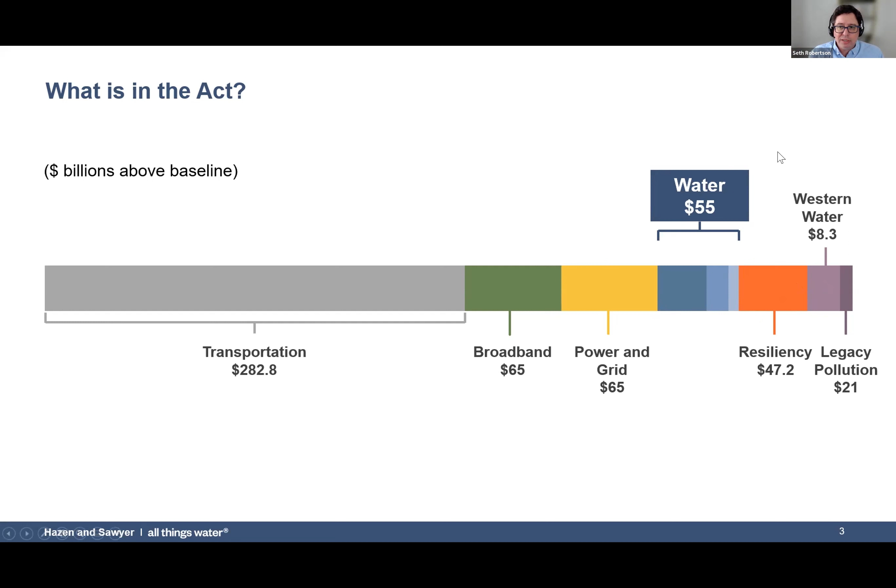One of the things out of that 55 billion that's very different than anything I've seen is the flip and the focus on drinking water. If you look at the SRF programs in particular, where most of this money is going to be flowing, most of it's going to be coming through the SRF.

Most of it's going to be going to Lindsay and their group and working through how to distribute these funds. What we've always seen pretty much universally is wastewater's always gotten more money, typically every year. It's an older program, it's had more in the system, but this is the first time we've really seen a funding source to the SRF emphasize drinking water.

And it's really in two major categories. One is lead service line replacement. $15 billion of the $35 billion for drinking water is going to lead service line replacement, and this is really in response to the lead and copper rule revision. So think inventory, investigation, replacing both private and public. And PFAS and emerging contaminants is another $9 billion.

Part of that's going to go through the SRF and part through other state means most likely. We're going to talk about PFAS in a subsequent session - that's obviously a big deal, and it's a large source of where this funding is going to come through. Another thing is we're just going to see a general increase in the base SRF amounts - $11 billion on the drinking water side, that just supplements the existing SRF.

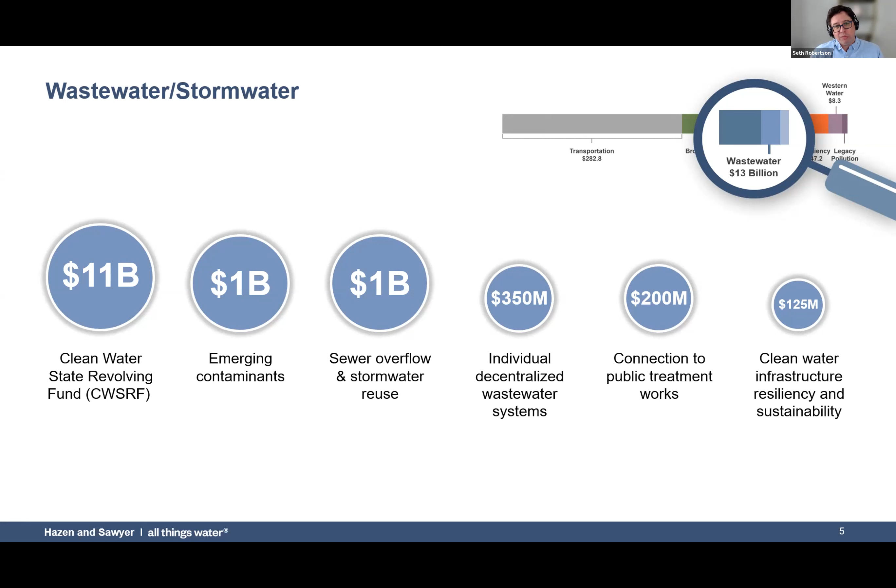For some of these other smaller programs, from pilot programs to just other new emphasis, that's going to take longer because you're going to have to set the programs up first, and then you're going to have to try to move money. So while some of the first money, especially from Bureau of Rec, is starting to happen now, I think SRF is going to be following very closely behind that. We're going to see some of these other programs probably late this year, even early next year, before they really get up and moving and start distributing funds.

Another thing that's been particularly exciting for me is an increase in water infrastructure resiliency funding. If you think about FEMA, which is where most of this money is going through, we've thought of FEMA in the past as mostly coming in after there's been some type of disaster event to either reimburse or to try to replace and repair infrastructure.

This has been a move that's really been happening over a few years, is to start providing more of an investment into pre-disaster mitigation type funds. So we've seen that in the FEMA hazard mitigation program. That's both a flood program. It's also the BRIC grant program, which is a relatively new program.

But we're starting to see more money, and we're going to see, I think, an ongoing emphasis in a number of the things that we're talking about today. So I don't think this is going to be necessarily a one-shot deal. So even if you look back at the drinking water numbers I threw out there, there are other funding sources potentially coming down the line, depending on how those spending bills are passed. There was the Build Back Better Act, which is kind of dead the way it is right now in Congress, that would add even additional funds potentially into things like lead service lines.

I think we're going to see more PFAS money coming down the line. You know, we're very early in the game for some of these things, and I think it just gives us an insight in what the focus is going to be, not just right now with this money, but also sort of looking long term as an emphasis from EPA's perspective.

Another thing that's continuing to get some play is cybersecurity and critical infrastructure. This becomes a bigger and bigger deal. The first time we really kind of saw this called out was probably in the ARPA funds, that there was a recommendation that those funds that were going directly to towns and cities and counties be considered for cybersecurity, especially around critical infrastructure, which includes drinking water and wastewater treatment, collection, distribution.

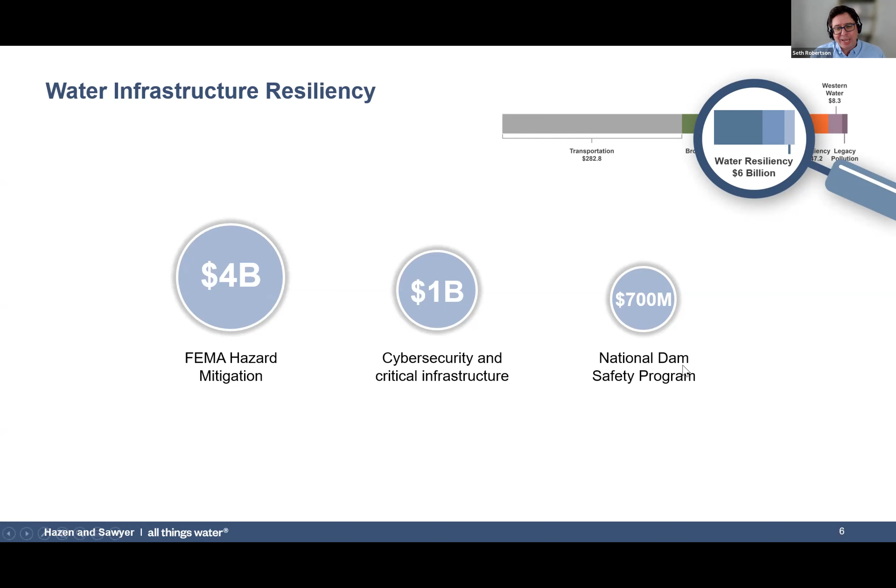Now there's $1 billion specifically set aside in this new bill to go towards those issues. Most of that money is going to be coming through Homeland Security from a distribution standpoint. And then we're also seeing additional money going through the National Dam Safety Program. Again, seeing continued shift in that emphasis to really removing dams from a water quality and safety standpoint, less on the repair side.

And then Western Water. So the Bureau of Rec is going to get its own basically $6 to $8 billion appropriation through the bill for a variety of different things. This money is actually most likely to move first. And Bureau of Rec is actually starting to move on some of these things. So this would probably be in many ways the money to pay attention to most right this moment, and to start sort of getting yourself prepared to go after some of this and to access some of this.

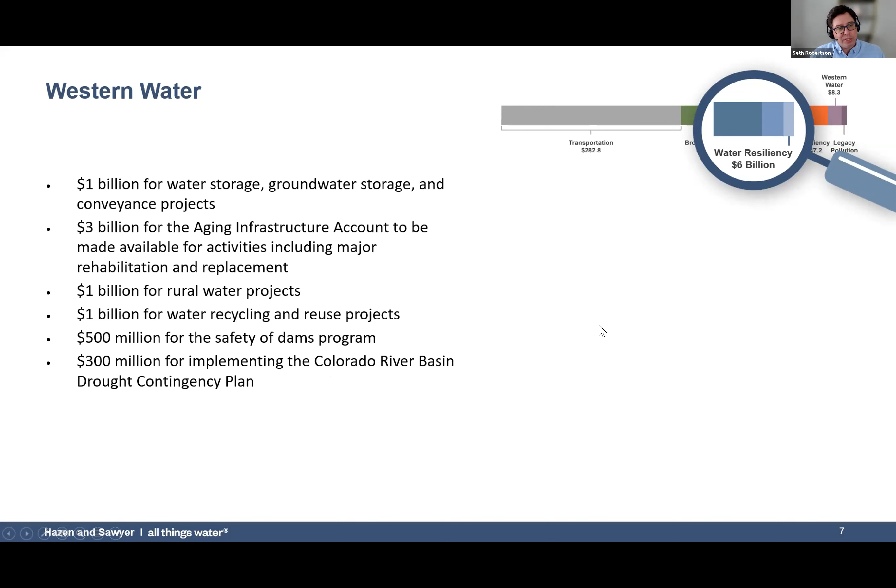So a variety of different things here, from aging infrastructure to general improvements to conveyance and storage and rural water and a number of different things. But again, a lot of existing programs here, existing sources, so it should be able to move pretty quickly. And then just talking really briefly about administration and why what Lindsay does is so important: the two main categories here outside of Bureau of Rec, which is really its own entity of where that goes and how that moves, is through the SRF and through FEMA, and they work differently.

So obviously you're familiar with the SRF program in Arizona, that you're going to work directly with them. They're going to work with EPA. The way this money will flow is through the typical capitalization grant process, which is how they get funded every year and have up until now. So it'll use similar processes. It's just going to have some different requirements, some different administration issues, obviously those specific set asides for different things that everyone's trying to work through right now, what that's going to look like and what those new conditions are going to be, especially things like Buy American and what impacts those are going to have. But that's going to be flowing over a 5-year period, basically into the SRF programs. And that's kind of how you're going to access that.

FEMA and their funds, for example, if you look at something like BRIC, it works differently. So you generally are working as a combination, both with your state emergency management agency and FEMA. The state emergency management agencies will basically gather projects that are an emphasis for them for sub applicants, and then they'll take those and apply for the money from FEMA, and it'll kind of pass through, and you'll be working with both. But it's a different setup, it's a different process.

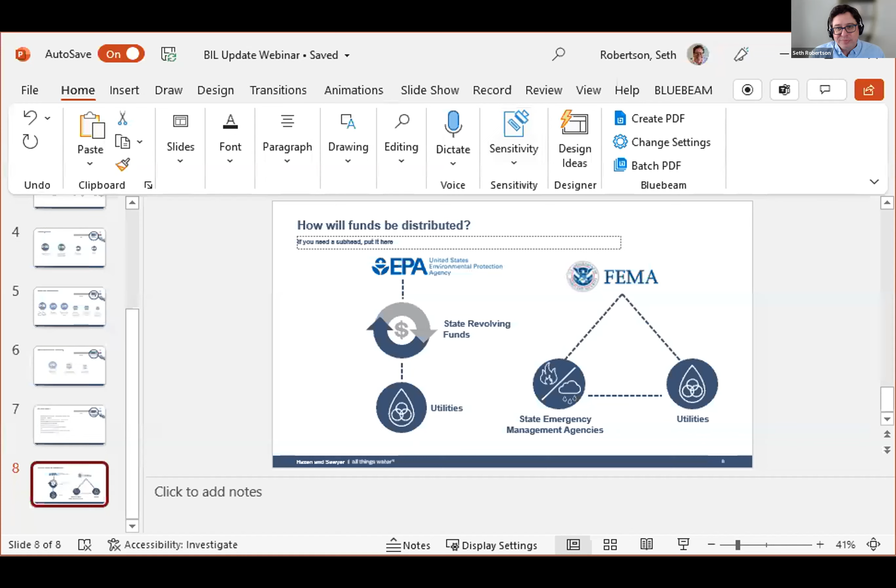Thanks so much, Seth. Yeah, I think that was a great introduction to the big high level picture of what BIL funding is all about. Just sharing my screen. One sec here. You able to see it? Yes, we are. Okay, perfect.

So as Seth mentioned and Andrea introduced me, I am Lindsay Jones. I work for the Water Infrastructure Finance Authority, or WIFA, and we are definitely staying very busy with all of this new money coming in. So before I talk more about the BIL funding specifically, I figured it'd be good to give a quick overview of WIFA, make sure everyone understands what we do as an SRF and who is eligible, what kind of projects are eligible.

So we manage the state revolving fund, which is basically getting grant funds from EPA, which we pass along as loans to our borrowers. And our real goal is to maintain and improve the water quality in Arizona and provide the financial and technical assistance that's needed to have all of our water and wastewater needs met.

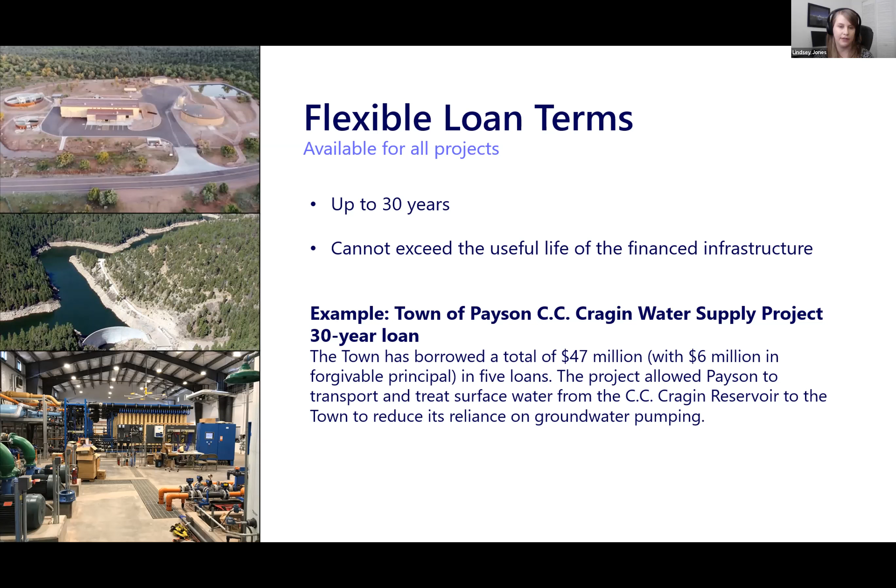As I mentioned, we can do up to 30 years for loans, with the one caveat being it can't exceed the useful life of the financed infrastructure. For larger projects, you could always have the option of splitting it into several loans, which is what the town of Payson did with their C.C. Cragin project, where they borrowed almost $50 million. They got about $6 million in forgivable, and they split that into 5 different loans. So lots of flexibility on the options for the loan terms.

We also, like I said, provide forgivable principal. So right now our policy for forgivable is for clean water projects, which are the wastewater and stormwater projects. If the community is eligible to be classified as disadvantaged, we can do up to 50% of the project costs. Or if they're doing green projects, any water or energy efficiency projects, reuse and reclaim projects, or stormwater projects, we could do up to 20%. And that's really just subject to availability and the priority list that we have.

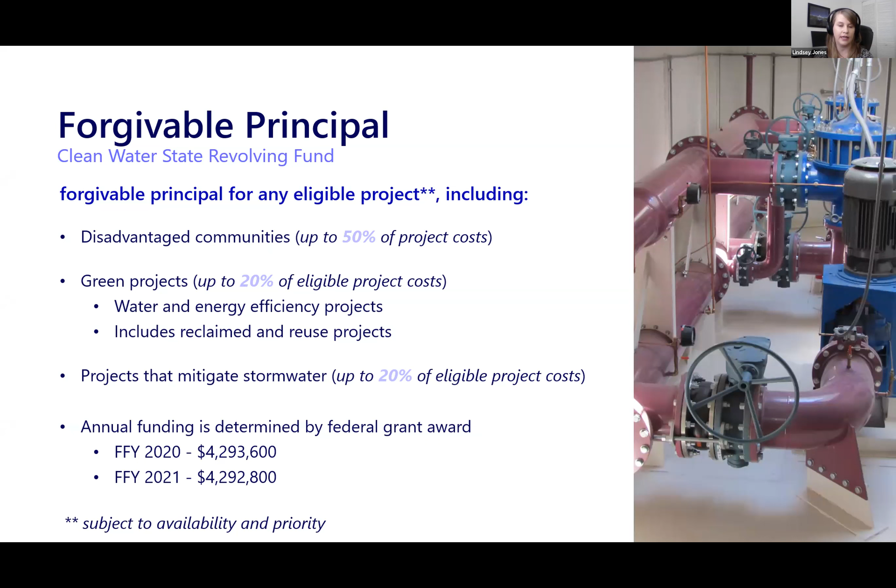So that's our current policy. And again, a few slides from now I'll get into the BIL funding and how some of this is going to be changing.

On the drinking water side, we also have forgivable principal. It does work a little differently, where basically we have 3 different tiers, which are more or less generous based on economic need and the public health benefits. So if they're disadvantaged and addressing a public health threat, we're going to be able to offer the most forgivable principal. The second tier is either disadvantaged or public health threat. And the third tier is for all infrastructure projects.

So on that side, we can be a little more generous, just because typically we've had a little more forgivable that we've been able to work with. So next, I'm going to discuss the specifics around the BIL funding. But first, I did want to give a definition of how we classify communities as disadvantaged.

It happens during the application process when an applicant puts in their initial project priority list application. We will score it and determine if they can be classified as disadvantaged. It's going to be based on affordability. If your community has low median household income, high water or wastewater rates, and a high level of existing debt, most likely you'd be classified as disadvantaged, and that would make you eligible for more forgivable principal. Or if the community is a colonia, then it's automatically classified as disadvantaged.

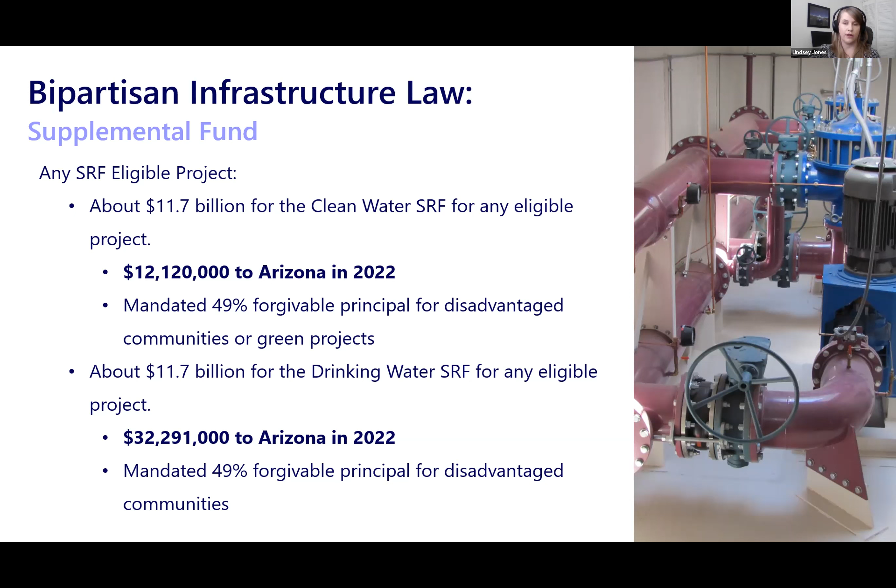As mentioned, there's also going to be specific money for the lead service line replacement fund, which is just going to the drinking water SRF. It's going to be about $50 million coming to Arizona SRF for 2022, to do full lead service line replacements. It can't be for partial replacements, but it could also include anything from planning, identification, design, and inventories to comply with the revised Lead and Copper Rule.

And again, they are making it a requirement that all of the forgivable we're able to offer, which is 49% of that 50 million, so about 25 million, will have to go to disadvantaged communities.

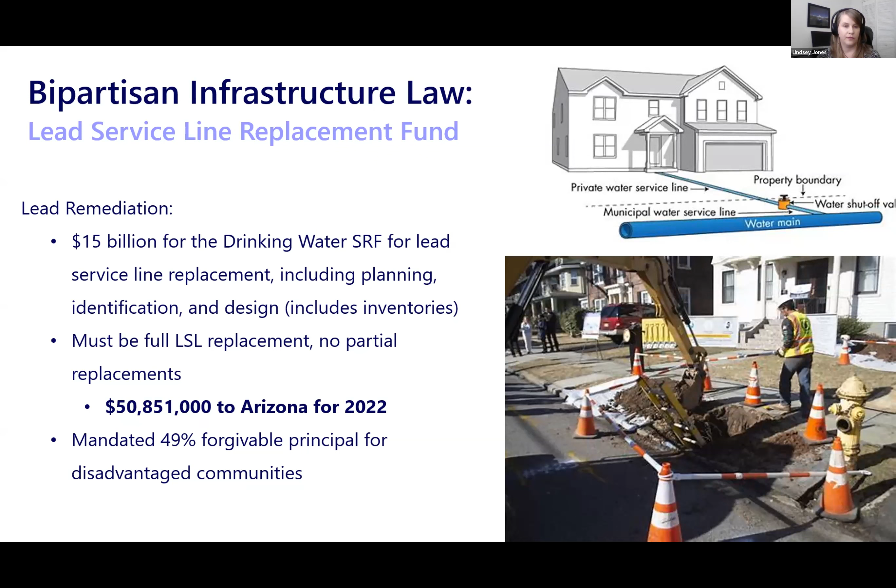And then we have the Emerging Contaminant Fund. That will have funds going into both the drinking water and clean water side.

On the clean water side, it's not a ton of funding. It's about $600,000 in 2022. Starting in 2023, it'll be about $1 million, and that'll continue for the next 4 years.

It will be available as 100% forgivable principal, and there's no restrictions for the clean water emerging contaminant funds on whether it has to go to disadvantaged communities or not. So pretty much anyone is eligible if you're doing a

PFAS project. We've also talked with EPA about other possible uses, especially on the clean water side. I know we have a project right now with Flagstaff where we're helping to pay for a forest thinning

project, and they seem to think that could be eligible for the clean water emerging contaminant funds because it really helps to protect the watershed from a variety of contaminants that would possibly occur after catastrophic wildfires.

So we could definitely be as imaginative and try to push the boundaries of what we could use that for, as long as it's addressing some sort of emerging contaminant.

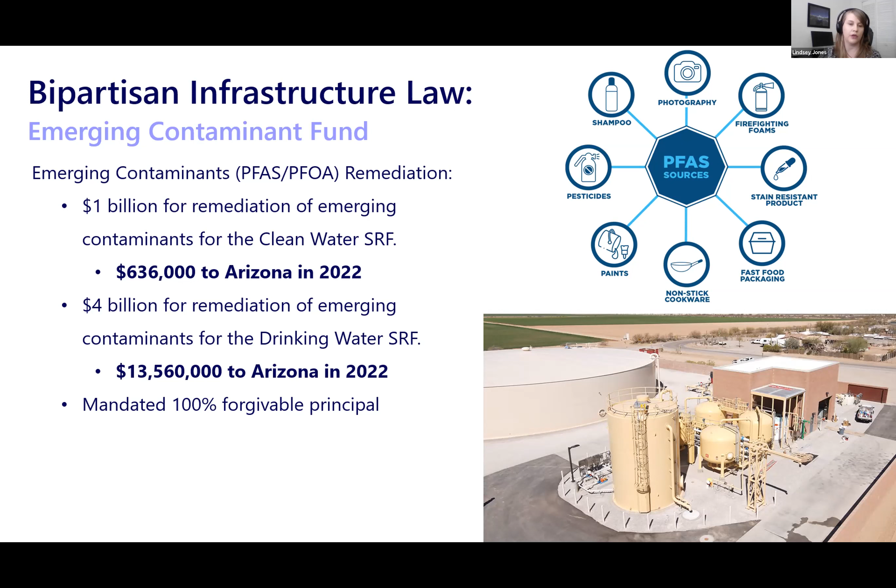And then really the big next steps. As Seth mentioned, we just recently got the BIL implementation memo from EPA. So we have been waiting for that for quite some time.

It just recently got released. So we are trying to work as quickly as possible now to create all the policies and procedures based on

the guidance that was provided in the implementation memo, and just how the funding will work, and more specifically how the new forgivable principal procedures will work and how the percentages are going to be allocated for different projects.

We also have the new Build America, Buy America Act, or BABA, which is across the board for all federal funding programs now. But for WIFA, we have...

We've known this is coming now, but we're still waiting for guidance from the Office of Management and Budget. OMB is newly in charge of this program, so I think they are also kind of scrambling to get guided, to figure out what guidance to provide.

It will go into effect starting, I believe, May 14th. So it's definitely coming soon. And it basically means pretty much all construction material is going to have to be domestically produced, similar to how right now we have the American Iron and Steel requirement.

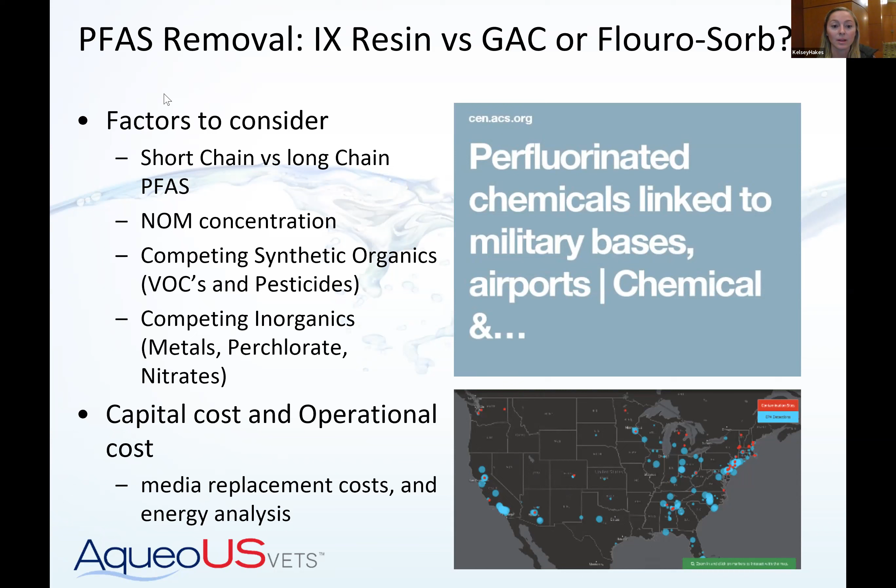Next slide, please. So just quickly touching on some of the key differences between those medias.

Typically, you're using a bituminous coal carbon for this application. They found that coconut carbons just don't work or don't last quite as long as the bituminous coal carbons. Go ahead with the next slide.

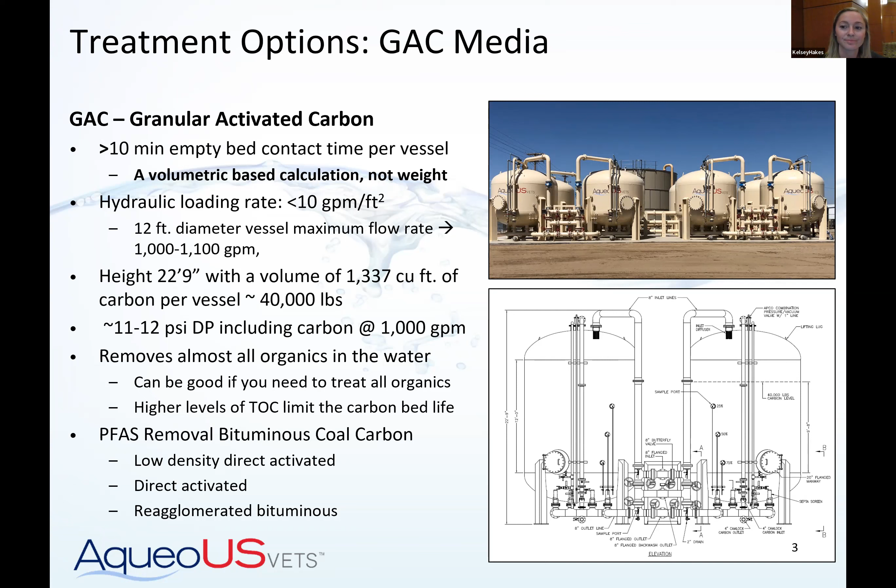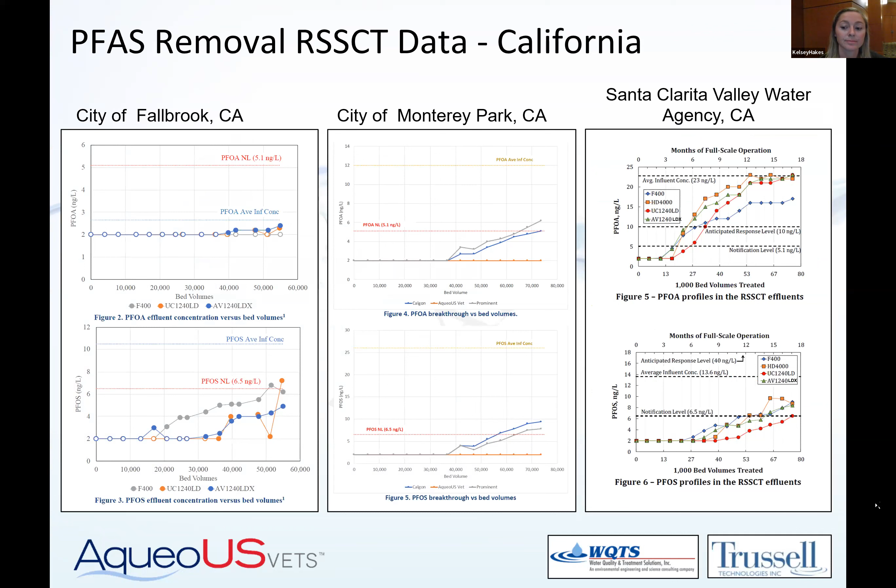There are already many full-scale installations, even in Arizona, with the City of Tucson - they're doing a dual application for peroxide quenching and PFAS removal. The City of Marana is using granular activated carbon for PFAS removal and peroxide quenching. So there are a lot of sites already in full scale, up and running, using carbon to treat for PFAS removal out there. These are example sites that you can reach out to and learn their design practices and see any lessons learned that they've gone through in their process.

Moving on to ion exchange resin, how that differs from granular activated carbon is it requires a lot less empty bed contact time. If you remember, carbon was 10 minutes empty bed contact time - typically, I'm seeing with ion exchange resin that people design to 2 to 3 minutes per vessel. What that means is you need about 5 times less volume of media in that same size vessel, so typically you can get away with much shorter vessels. Looking at the system drawing in the bottom right, that system height is about 16 feet - remember, the carbon system was about 23 feet, so significantly shorter.

Also, an advantage of ion exchange resin is you can allow a lot more flow rate through a single system size. Where that carbon system was 1,000 GPM for a 12-foot diameter vessel, that same 12-foot diameter vessel can actually go up to 2,000 GPM for ion exchange resin. So typically, with resins versus carbons, the resin systems are going to be a bit smaller in footprint and shorter, and the carbon systems will be a bit larger. I'd say the disadvantage of the ion exchange resin is it does produce more head loss than the carbon treatment system, so evaluating those energy costs in comparison to carbon, and also looking at your pump curves and making sure you don't need any upgrades to your pump or require any boosting if you were to go down the ion exchange resin route.

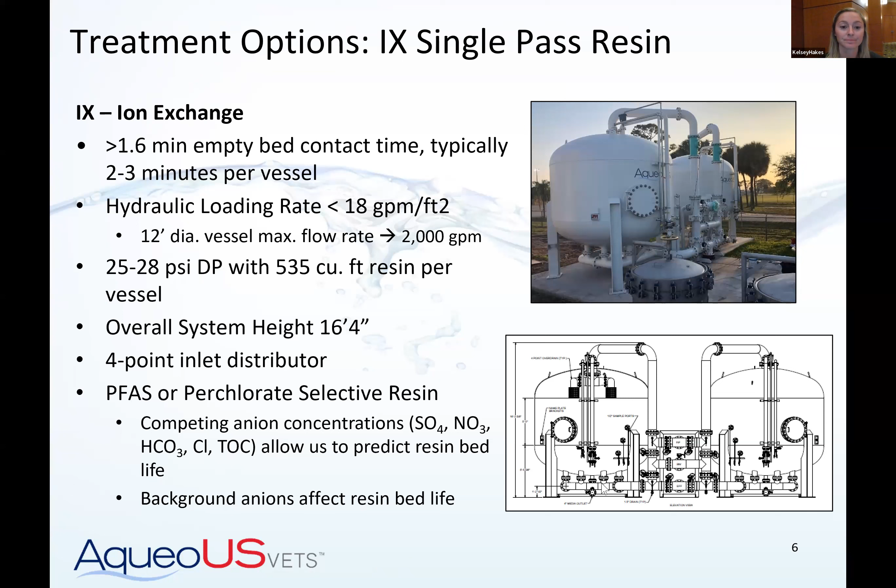And there are many installations for ion exchange resin systems. The nice thing about the PFAS selective resin really originating from a perchlorate selective resin is that there's many installations for perchlorate treatment, actually mostly in California, in Southern California from the contamination there, which means it's tried and true to the industry as well.

You guys in Arizona have not seen the need as California has for a single pass ion exchange resin. You guys typically use resins for nitrate, but that's a different type of system in that you're doing on-site regeneration, or even if you've used resin for arsenic, that's also an on-site regeneration resin. This is single use, which means you send it to an incineration facility, and then you'll be using virgin resin with each change out. Just basically like you do with carbon, in the sense you're receiving back virgin material after it's spent.

But some of the locations that have already moved forward with ion exchange resin, I've mostly been in California as far as nearest location to Arizona. There is an ion exchange resin system going in with the city of Tempe that we're currently manufacturing, but it has not been installed yet. It's under production.

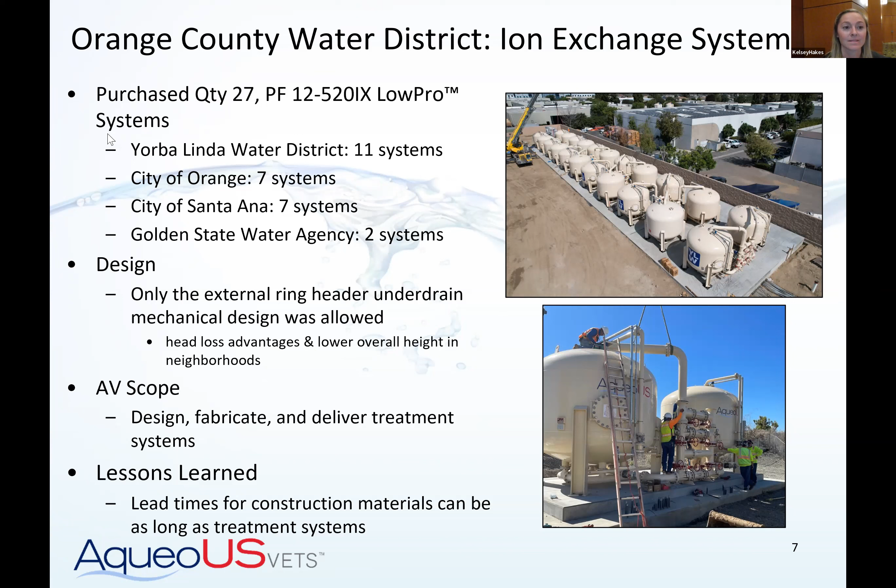And even though there are in-lab testing methods for granular activated carbon, there currently isn't an ASTM method for ion exchange resins. So you can always go the route of piloting, comparing the two media to one another, or even comparing products to one another, because there are several manufacturers out there for resins, and several manufacturers for carbons as well. Depending on your water quality, the results will change on which is the better selection for your site. The water quality is the most important factor, I'd say, in finding out what product is best for your individual site. So go ahead, next slide.

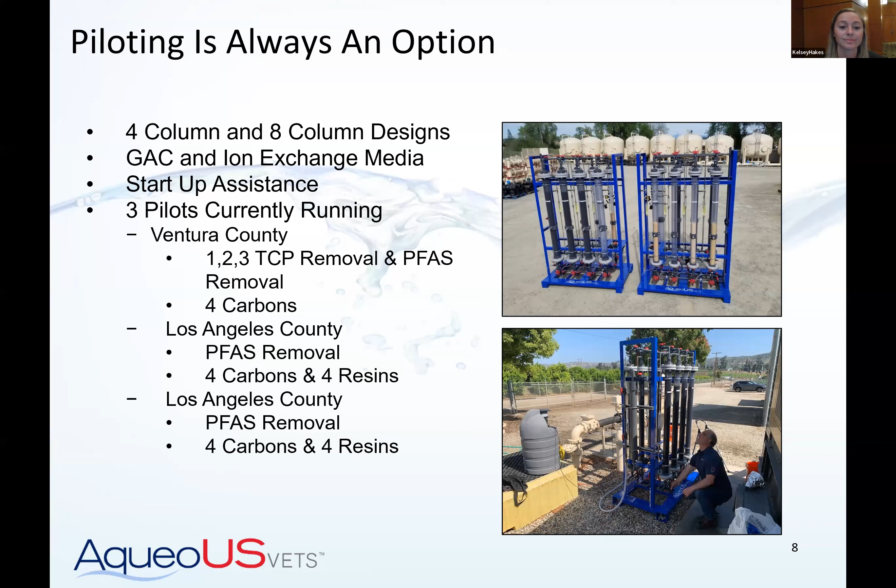And then last slide, just showing you a comparison between the ion exchange resin and granular activated carbon. There's benefits to both, but it's really evaluating your individual site and your project needs. Typically, I find that if you've got a very small footprint site, ion exchange resin is the better selected media because you just don't need as large of equipment or as many systems for higher flow rates.

If someone's trying to avoid pump upgrades and looking for less head loss, you could go with granular activated carbon. When you have dual applications like the city of Tucson or city of Marana, where they use the carbon for peroxide quenching downstream of their UV AOP system, they make it a dual application system where they're also treating for PFAS.

And then resin also offers you a performance guarantee, which is great because it's a selective media. It's a lot easier to model accurate predictions on the bed life. Whereas with carbon, since it adsorbs all organics in your water, your TOC levels play a large factor in how long that carbon is going to last. And as you know, TOC is a makeup of thousands of organics, and they all have different adsorption rates. So a concentration, while good to have, doesn't really tell us enough to say how it's going to interact with that carbon and how it's going to affect that carbon's life.

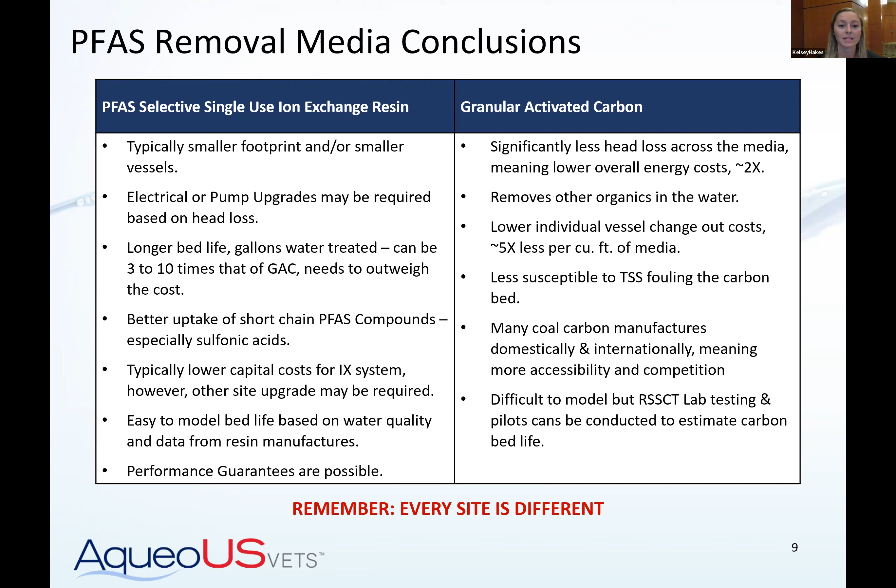And I think next slide, and I think that's it. Tried to be quick there, so if there's any questions, let me know.

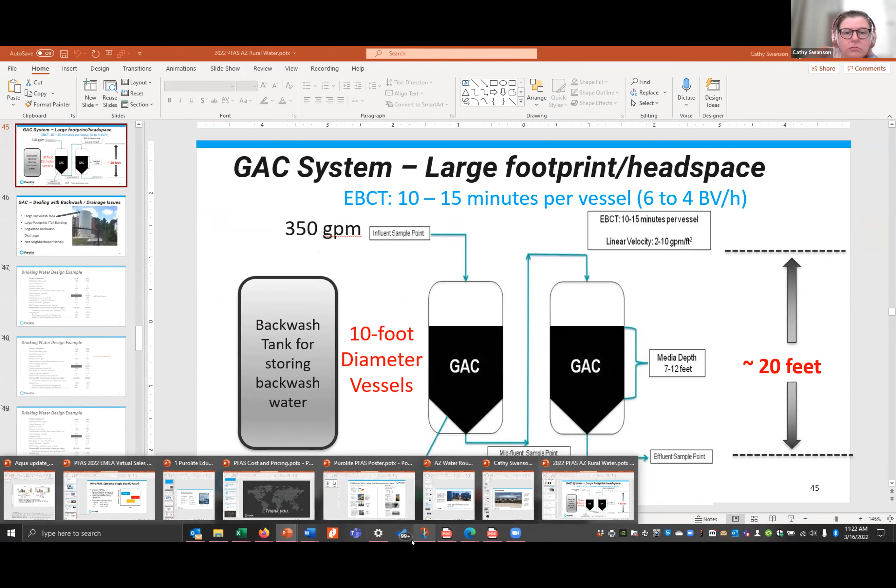Of course, it's at the end. Okay. That's the wrong one, actually. My apologies. Okay. Good.

All right, PFAS. It's interesting, I've had a lot of people say to me, why do we care? It's parts per trillion. Every time they come up with a new measurement, we get a new regulation, is how some people feel, and I understand that.

We are talking about parts per trillion levels. The problem is it's bioaccumulative and environmentally persistent. That's why we call it forever chemicals. It does accumulate in the blood. Basically everybody on this call probably has a pretty good chance of having PFAS in their system.

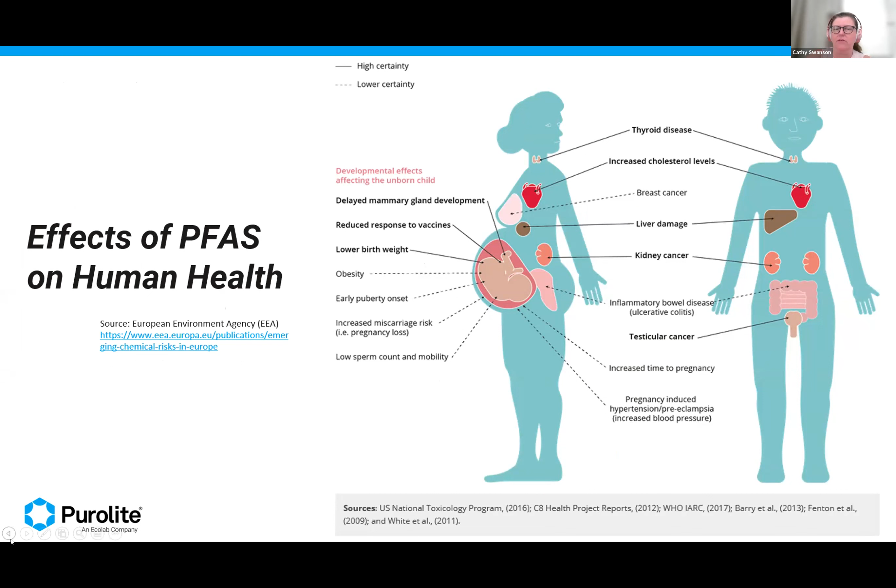Why do we care about that? It's because there are a lot of documented health effects when it comes to PFAS. The European Environment Agency put this graphic together, and I think it's extremely effective. The ones with solid lines are higher certainty, the dashed lines are lower certainty. But there's quite a lot of health effects that PFAS can have.

I realize not everybody on the call is looking at drinking water, but at the end of the day, the EPA is also looking at PFAS regulations for discharge permits, and of course we're going to be talking about biosolids. If we can keep it out of drinking water and take it out at the source, then we don't have to worry about it on the biosolids side either.

The trend over the years has been to regulate to lower levels and regulate more and more PFAS. Hawaii came out, and I believe they have health advisories for 18 different PFAS compounds right now.

Interesting. So I work for Purolite, an ion exchange manufacturer, and I believe very strongly in ion exchange as a solution for PFAS.

Couple different reasons, and Kelsey touched on some of them. It's a smaller footprint. It's effective at long chain, and more effective than other technologies at short chain. You don't have any liquid waste during operation. And at the end of the day, everybody speaks wallet.

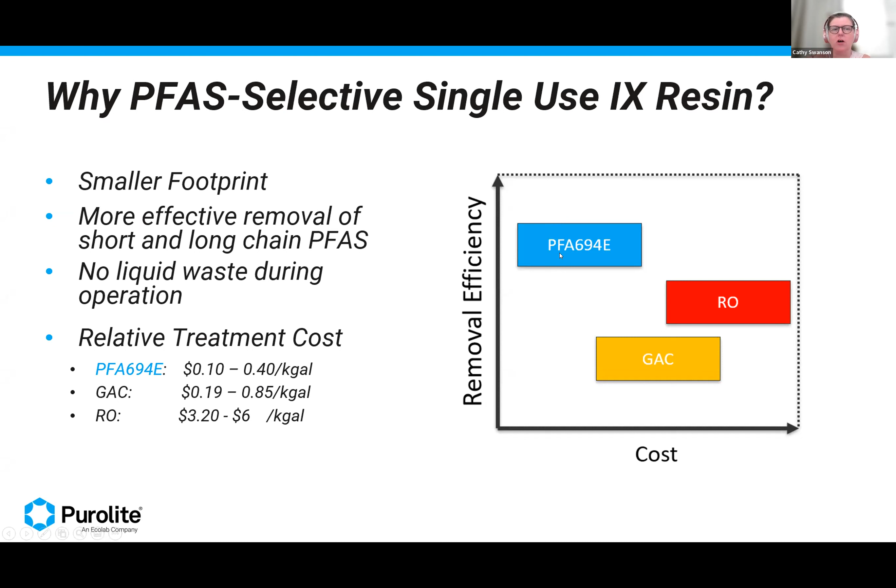As Kelsey said, it's going to depend on your water quality. There are some waters where it's cheaper to use GAC. But really taking a look at that and figuring out what's best for your system, we generally find that ion exchange is a lower cost operationally, as well as from a capital perspective.

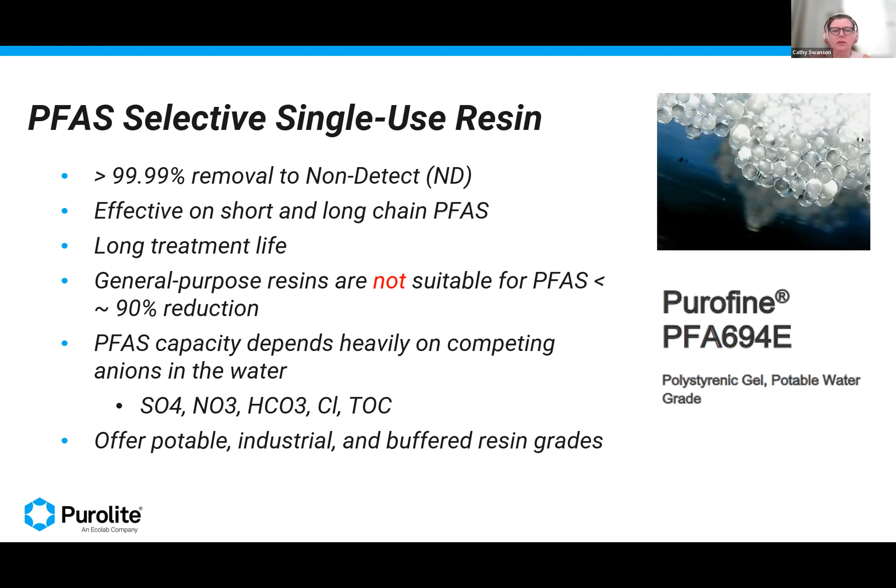So we have a PFAS selective single-use ion exchange resin. It can take PFAS out to non-detect. One of the nice things about this resin is that if we have information on the other background ions in the water—sulfate, nitrate, chlorides, etc.—we can model with extreme accuracy how long that resin is going to last.

We do have a design guideline book. Give me a shout if you'd like a copy of this. It's not a book, it's a brochure, but it's pretty helpful in trying to figure out how to treat in a system.

Some people have done RSSCT studies comparing ion exchange and GAC. This is one site in Arizona, done by Carollo. With this particular water quality, they found that the ion exchange resin gave them almost 10 times more life in terms of time.

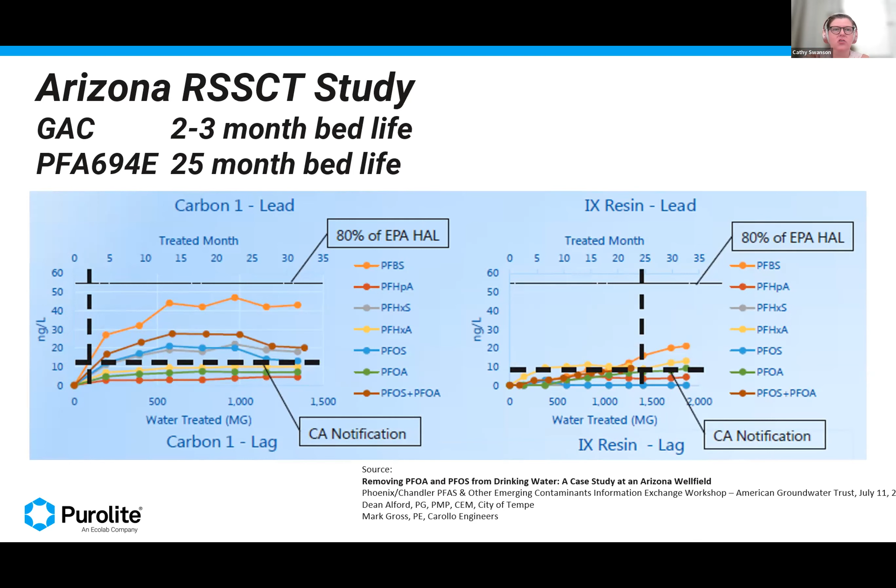There are numerous installations in at least half the states in the country, including Arizona. This is one example right here, at the Air Force Air Base Luke. They put in a system to treat drinking water. That's been up and operating—time flies—but it's been at least within the last year.

As Kelsey mentioned, there's a couple more going in Tucson and Tempe. So definitely experience within the state.

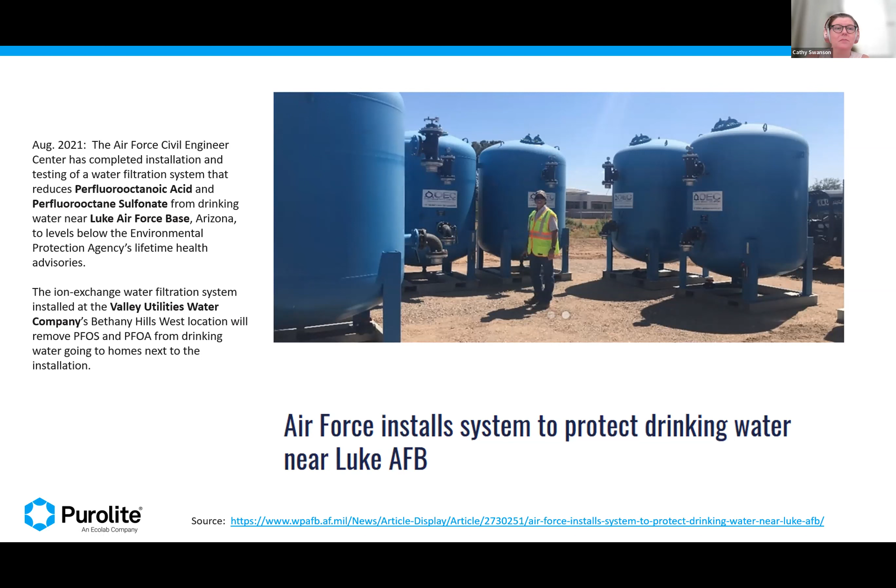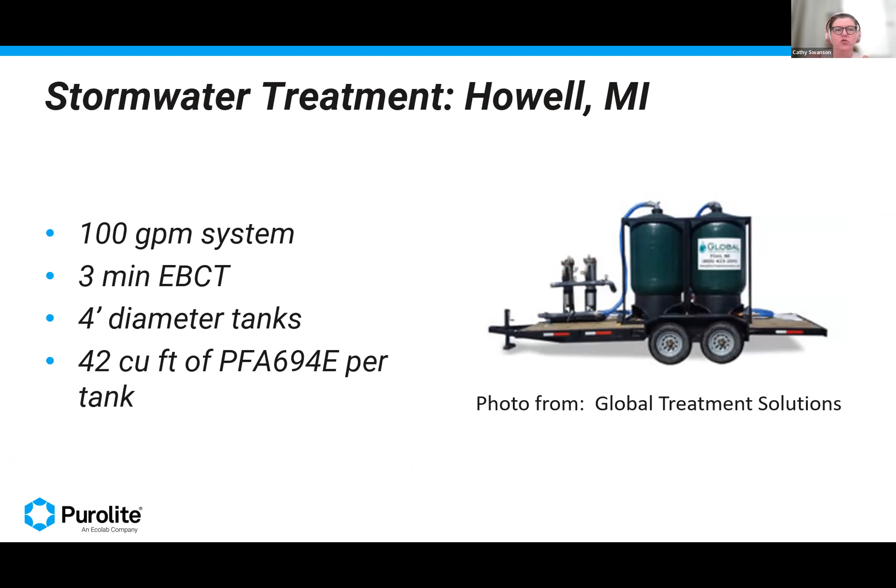This is a stormwater treatment system in Howell, Michigan. It's a little 100 GPM system, basically a couple of vessels on a trailer. It's been running for over 2 years without a change out, so it's pretty affordable from the standpoint of a little portable mobile treatment system.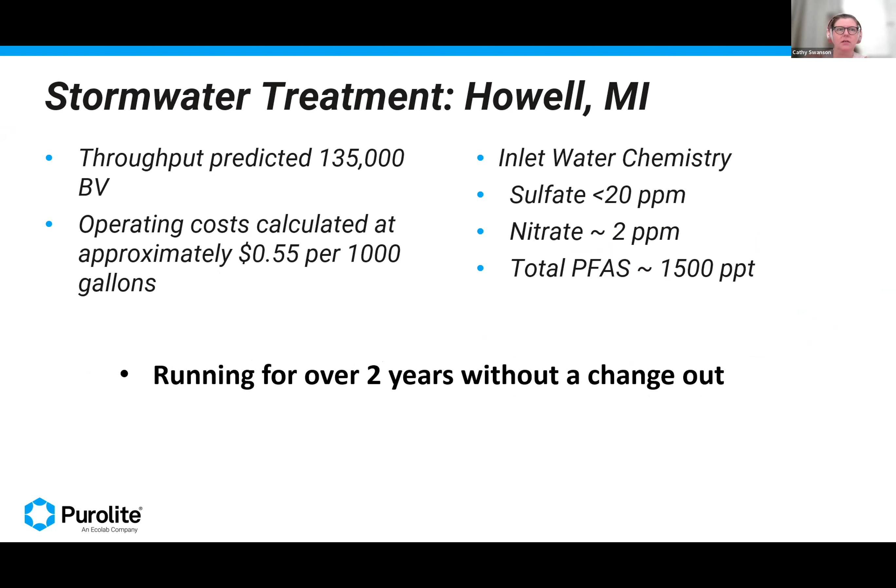Jeff, would you like to share with us a little bit about your experience with PFAS?

Hi, how is everyone? Great, here in Pima County, we—let me try to share my video as well. It keeps changing screens on me when I hover over it. It's a nice trick.

Here in Pima County, we are very cognizant of some of the challenges our local communities have been having with PFAS. We all know we have PFAS in our groundwater systems, especially if located near a previous military installation or an Air Force base. One of the questions we had was: did the PFAS in our groundwater system get there solely from seepage, or were wastewater treatment facilities a contributing factor, discharging to our waterways and also our biosolids that we've been land-applying for the last 40 years here in Pima County, predominantly in the Marana Farms just north of our city, all the way up to Casa Grande.

In 2020, the Board of Supervisors took a one-year hiatus on land application of biosolids to do a study determining the impacts of our activities over the last 40 years. We selected land application sites that received biosolids at different intervals over the last 20 to 30 years and at different loading rates.

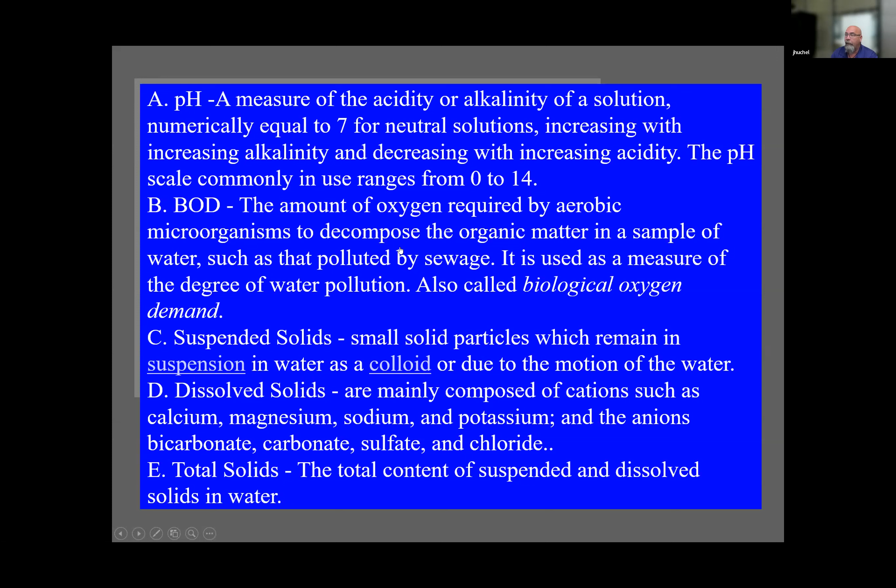So again, pH is a measure of acidity and alkalinity. BOD, the amount of oxygen required for aerobic microorganisms to decompose organic matter. Suspended solids, small solid particles that remain in suspension in the water. Dissolved solids, we all know what those are: calcium, magnesium, sodium. And then total solids, the total content of suspended and dissolved solids in the water. And Salas, you get to pick again. I got 500 points for that. Laboratory for 100. All right.

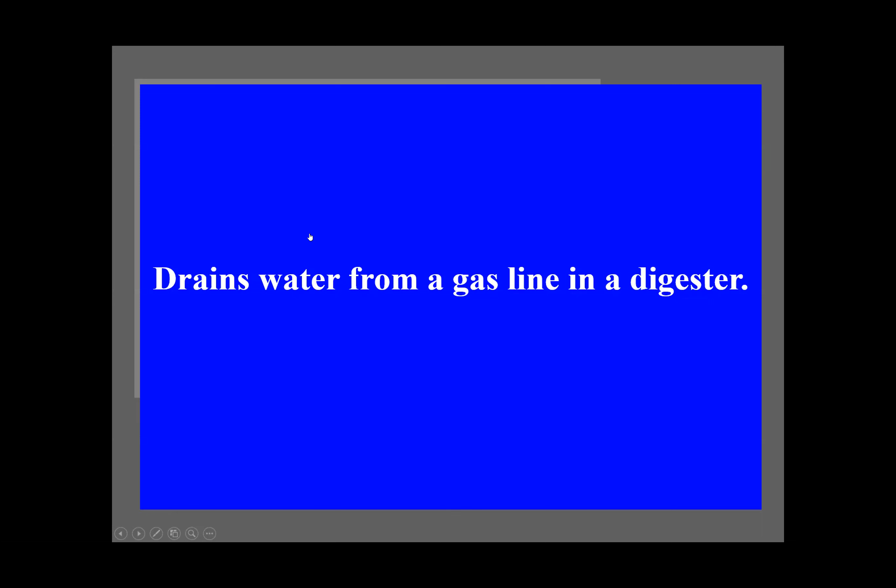What's this water from? What is a condensation trap? Who answered? That was Mike Davis. I'm sorry, I need to play by the rules. Oh, that's okay. You're doing good. What is a drip trap? Yeah. Condensation trap, drip trap. Good answer. Does that work? Yeah, that works. It all depends on what part of the country you live in. There's all sorts of names. Next, activated sludge for 100.

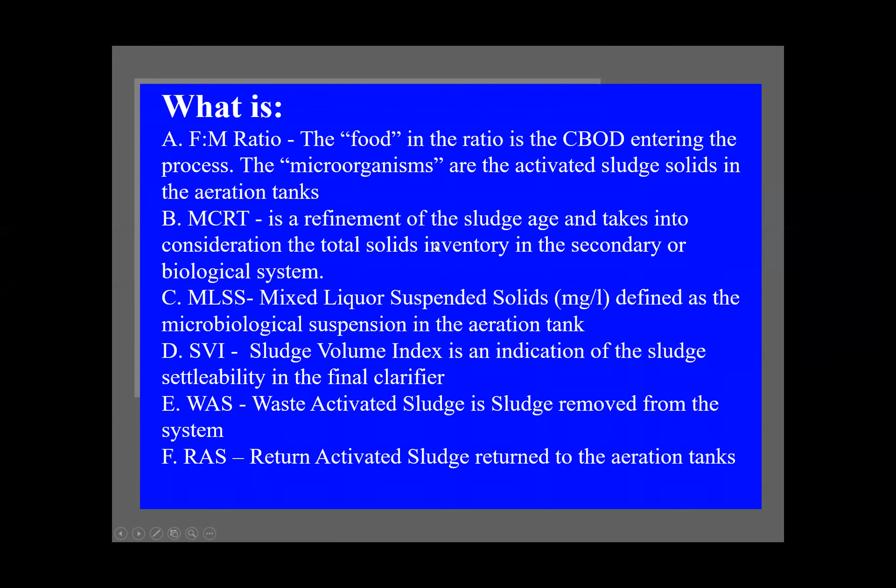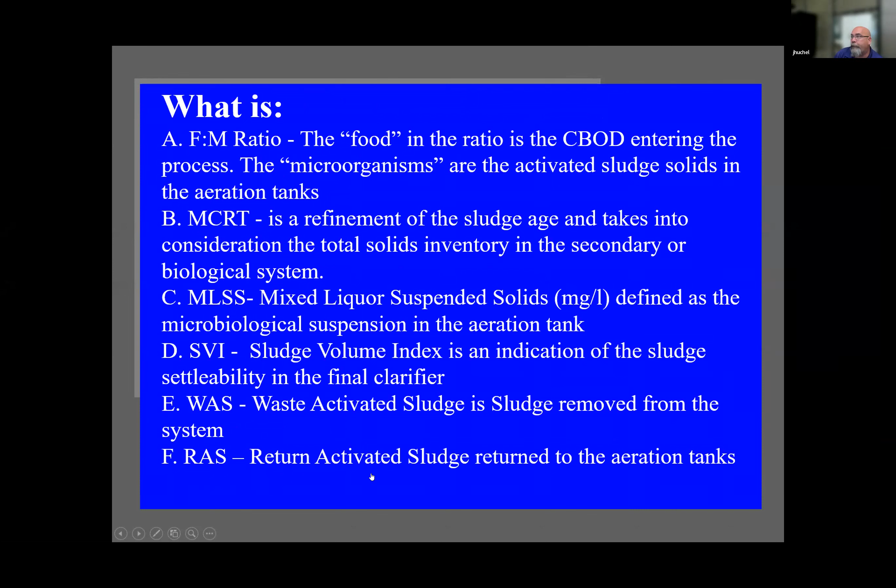And you only have to do one of those. I'll give it to you. Darren, RAS is return activated sludge. Good answer. And again, whenever I first set this up, it was for training. So I was trying to get across a lot of different points. So that's why there's so many different answers. But you're exactly right. So what is our next topic? Activated sludge for 200.

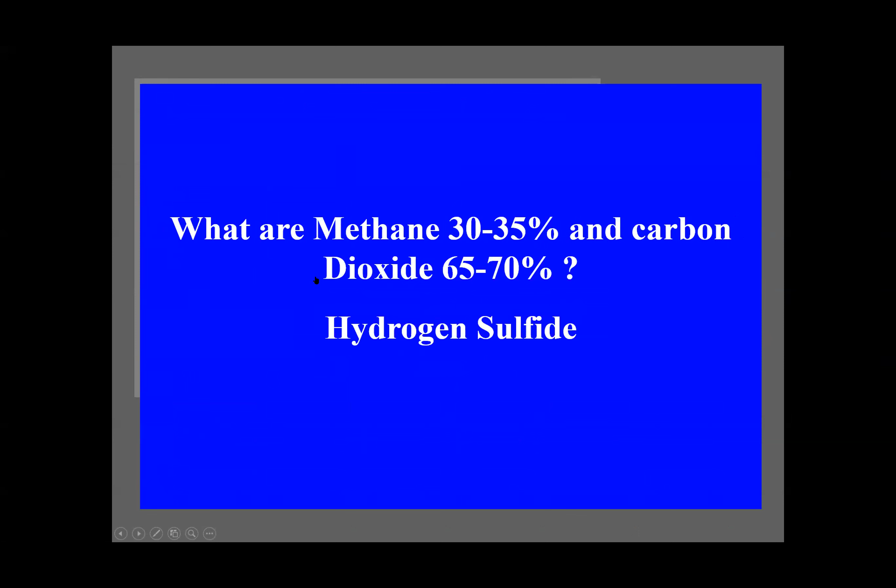Oh, I think I hit the wrong one. My bad. Anybody want to go on this one? Mike Davis: methane and carbon dioxide. Do you want to guess another one for the bonus? H2S, hydrogen sulfide. Look at that. He gets double the points. Nice. That was for 200, plus he got the extra points, right? Yep. So a total of 400 points on that one. Good job. And then we're going to go back to activated sludge because I clicked the wrong button. Gotcha.

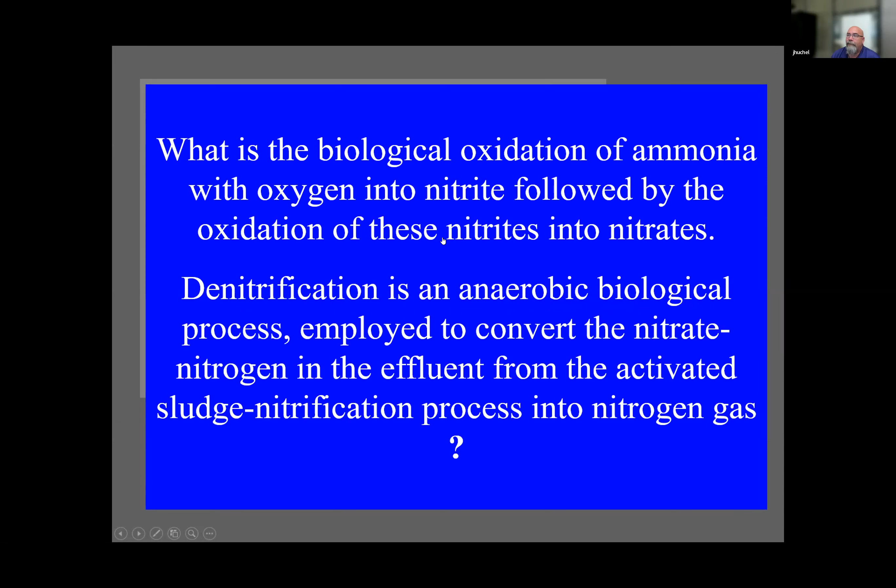And you only have to define one of them. Mike: I don't know about define, but we use denitrification to reduce our nitrates and nitrification to reduce our ammonia. And he is correct. In a nutshell. So just to give an update, everybody, Xavier has got 100 points, Mike Davis is at 800 and Darren's at 400. Whoever just answered, what topic would you like to do next? That was Mike. Pumps and pumps for 100.

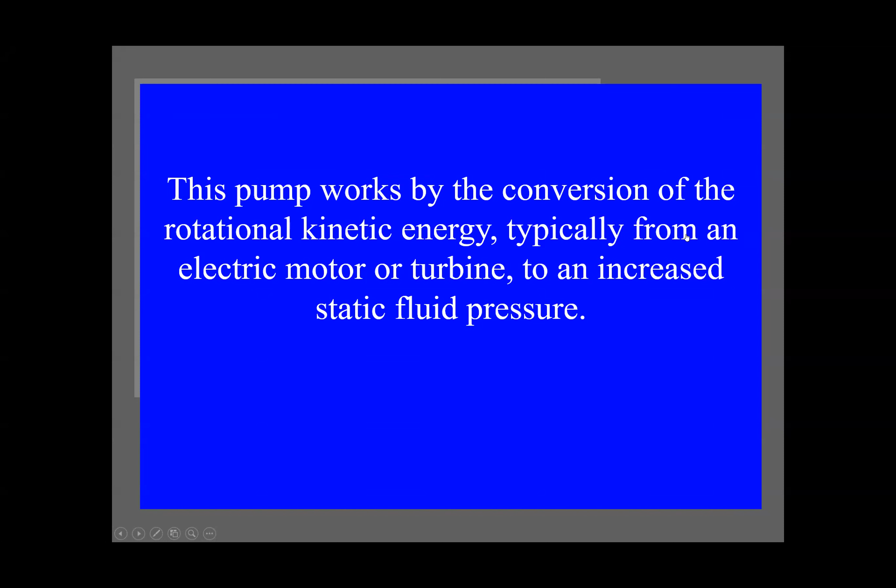And we don't subtract points if you're wrong. Mike Davis again. Centrifugal pump. What is a centrifugal pump? Good answer. Next, pumps and pumps for 200. Yes, sir.

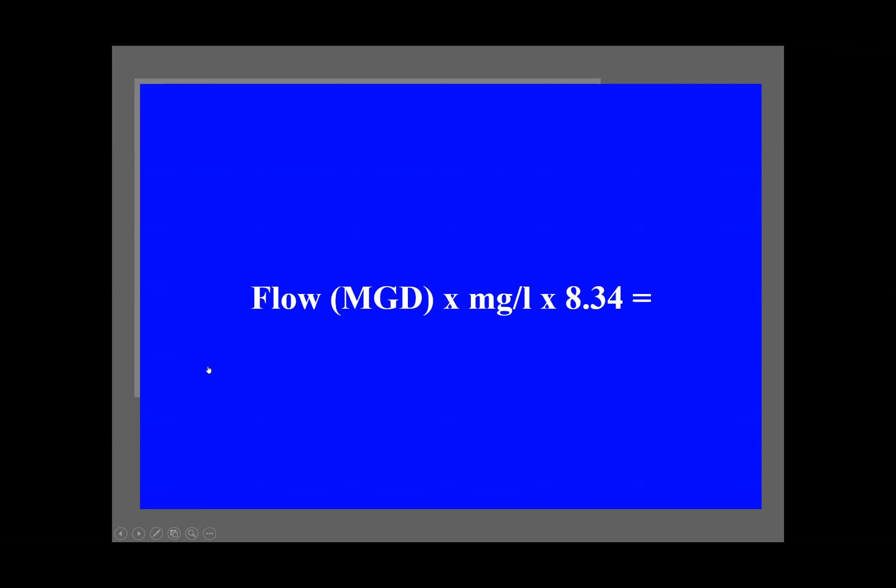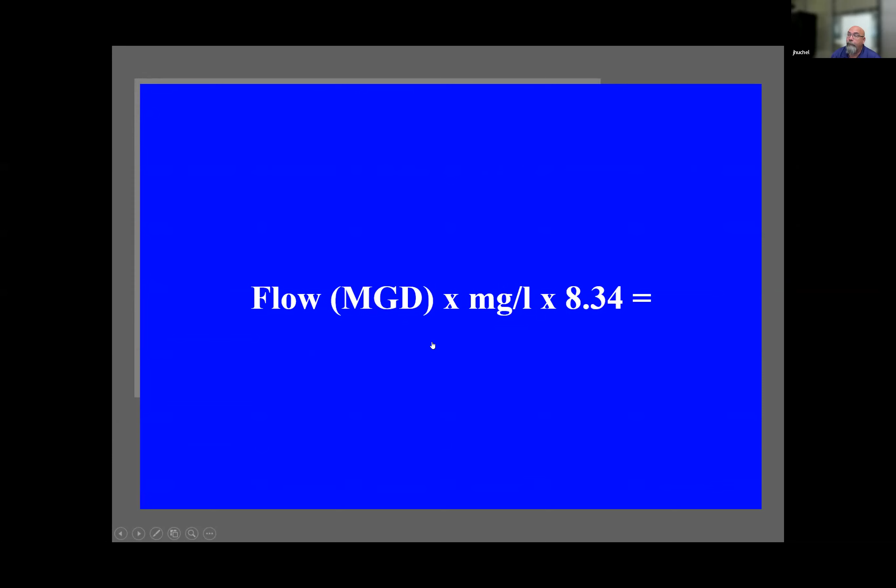Anybody? Going once? Going twice? What's the formula for loading in pounds per day? Since I know that one, let me pick the next topic. Oh, let's go potluck. I forget what this one is.

Darren: What is fecal coliform? Good answer. How much was that one for? 200. Okay. Do potluck for 300. Oh, sorry. I duplicated, my bad. We're gonna kick you down to 400.

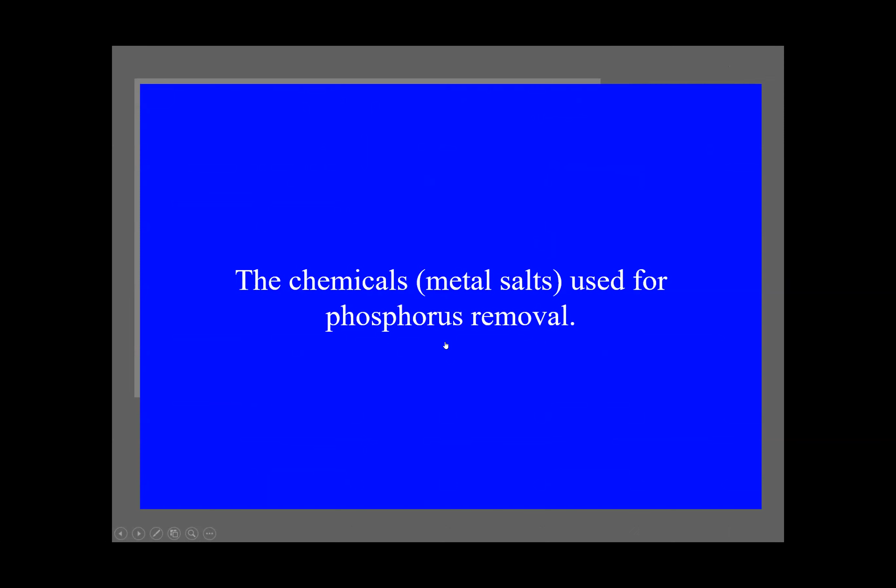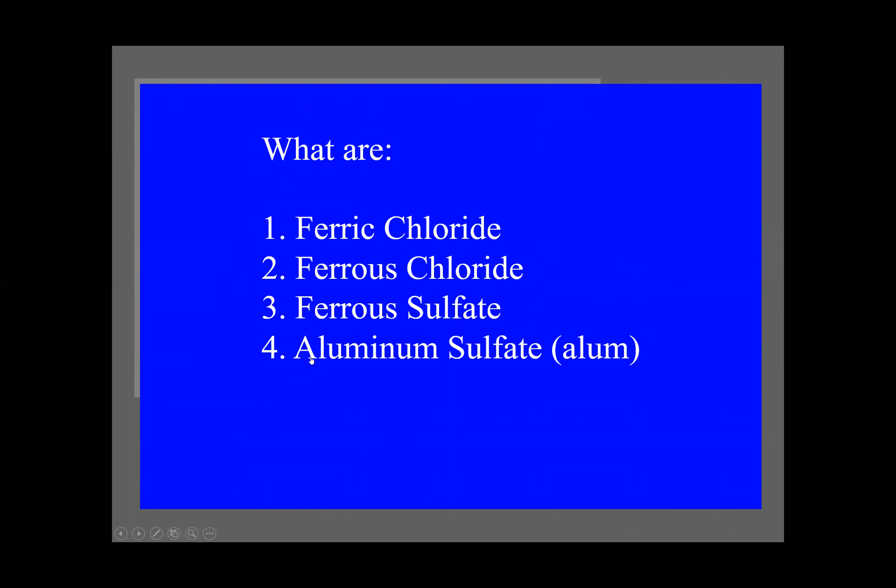Now, Mike. Mike Davis: Ferric chloride. It's one of them. I'll take that answer. But it's also ferrous chloride, ferrous sulfate, and aluminum sulfate. All right. Yeah, we use ferrous, but we've been discussing, because we got a phosphorus problem, that we're going to start using ferric chloride. I like aluminum sulfate because you don't stain everything red. And it works really well. Just my opinion.

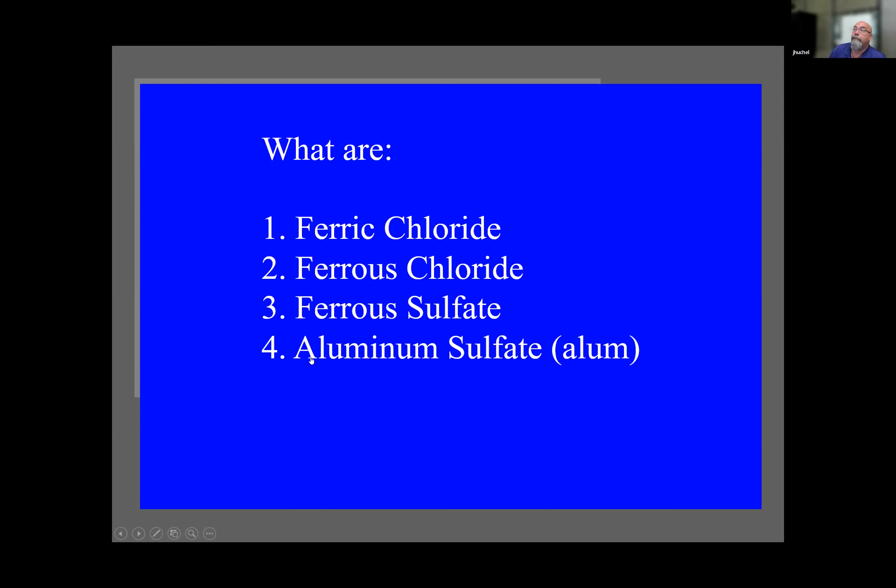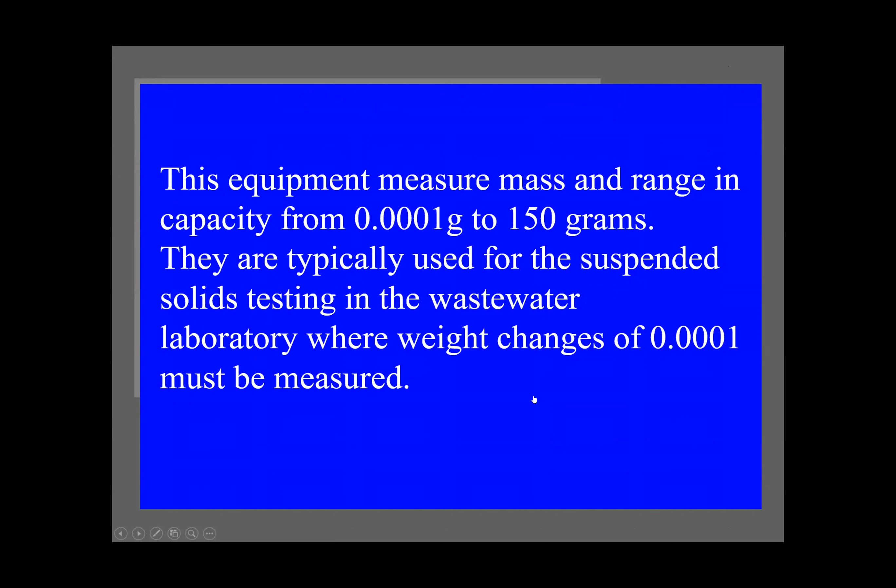All right. What's our next topic? Activated sludge for 300. Mike: Class A and Class B. Class A and Class B. Good job. What's next? Laboratory for 200. Oh, I'm sorry, that was Mike Davis. I wasn't paying attention, I'm sorry. I was looking at the scoreboard. Mike. Analytical balance. Good answer. Where are we going next? That's a good thing, Mike. Yeah.

Activated sludge for 300. You only have to describe one of them. Mike, did you raise your hand again, or was that just left over? I think it was left over. Is my hand down now? Yes. Okay. Sorry. Let's see.

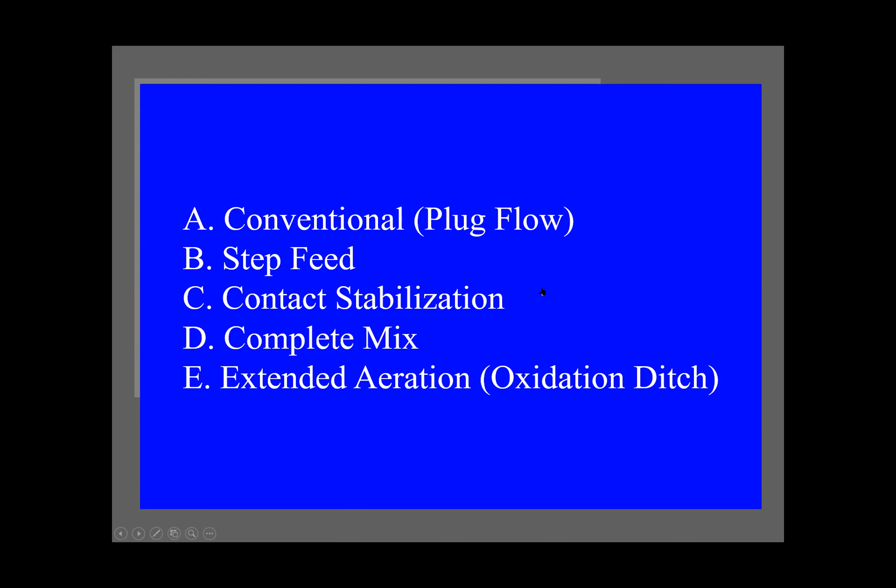Complete mix. So the complete mix is when you have your mixed liquor or your bioreactor and all zones are completely mixed. You're feeding, like for us, we feed one zone, it carries over to the next zone, but it's completely mixed as one homogeneous product. Jim, you're the judge as well. So I will give him credit on that one. Partial credit, maybe. I don't know if I got it all. And again, some of the questions are a little longer, and I would spend 30 or 40 minutes just talking about the 5 different types of activated sludge. But good answer. Let's move on to the next one.

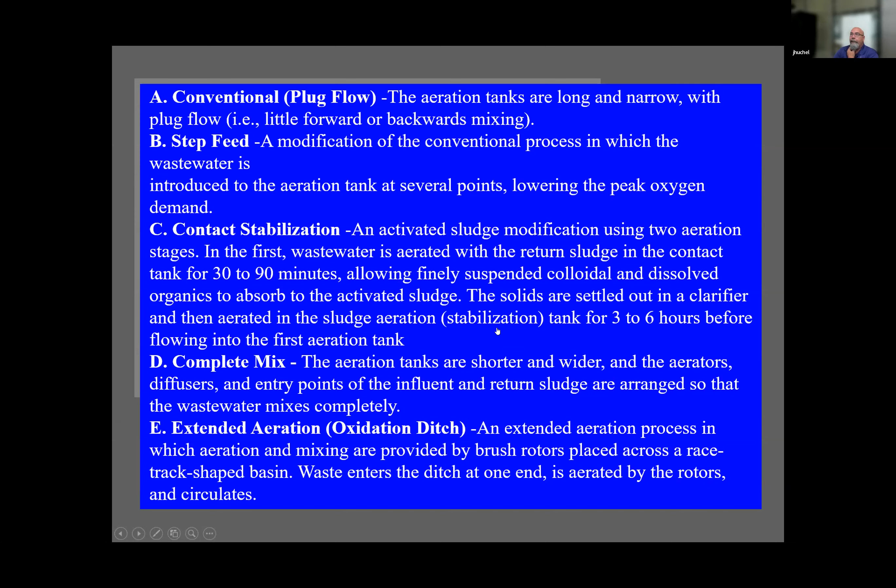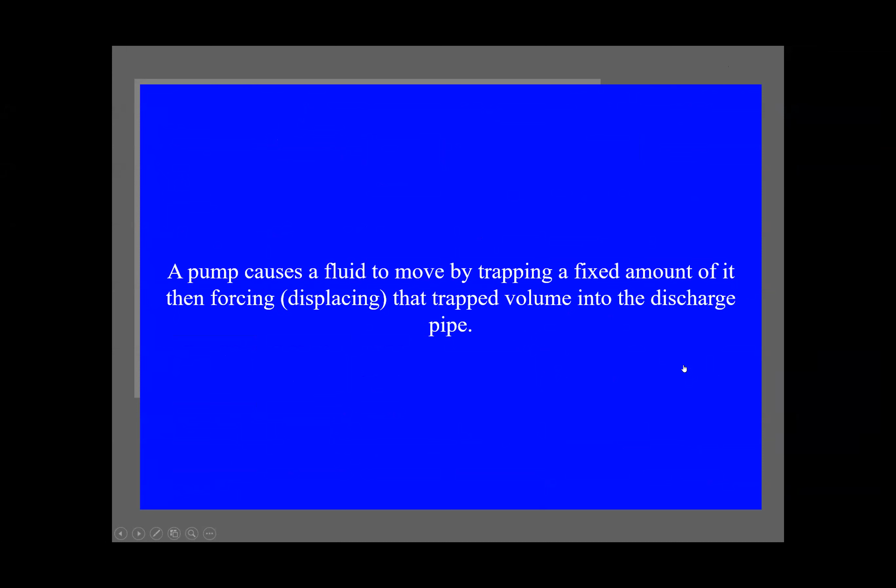Pumps and pumping for 300. Darren: What is a positive displacement pump? You got it. I was even looking at the wrong thing. And again, there's some examples of different types of positive displacement pumps. Okay. Update: Mike Davis has a commanding lead at 2,100. Darren's at 1,100. And is it Xavier or Javier? I'm not sure. But yeah, you're still in it, bud. So now we get the big dollar ones. Darren, you get to pick the next category. Same category, please. Pumps and pumping.

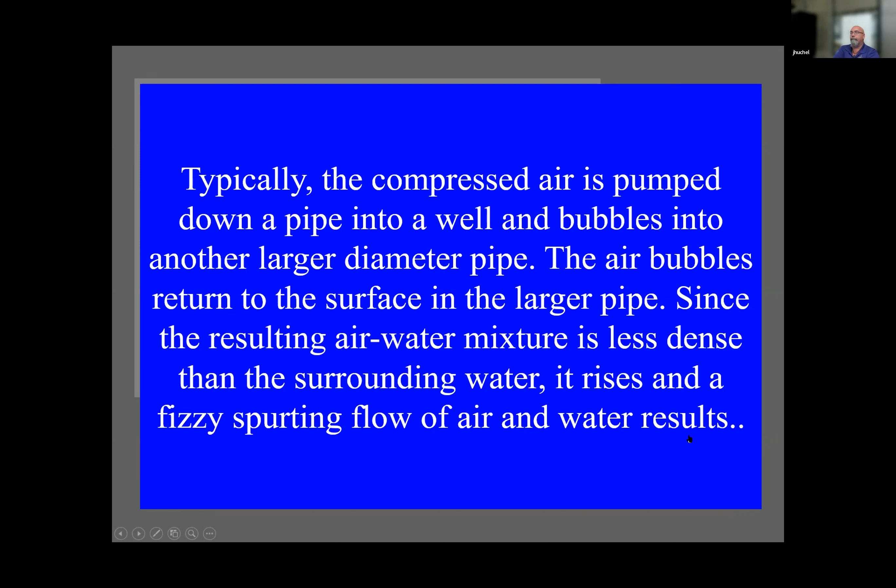Darren: What is an airlift pump? That is exactly the right answer. You're cheating because he's got some of those. I hate those. You know, there's no such thing as cheating in this game.

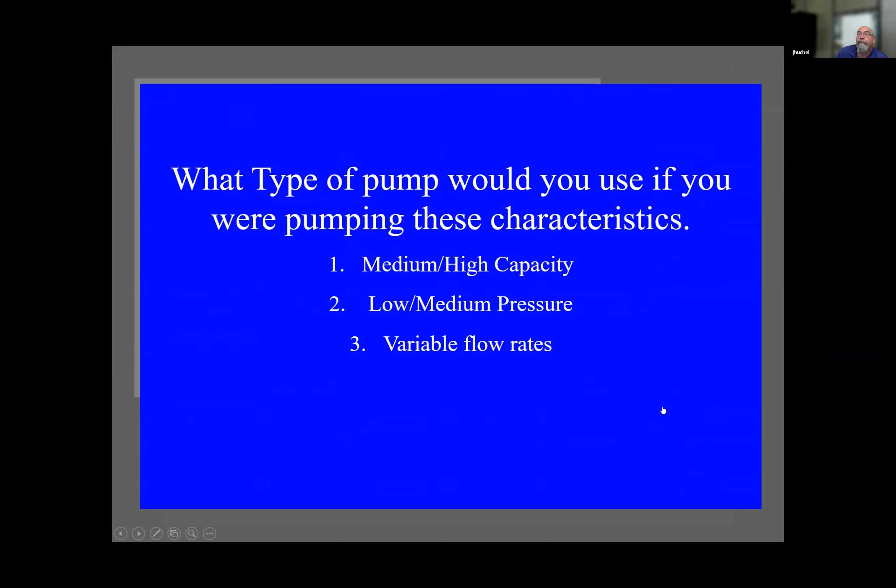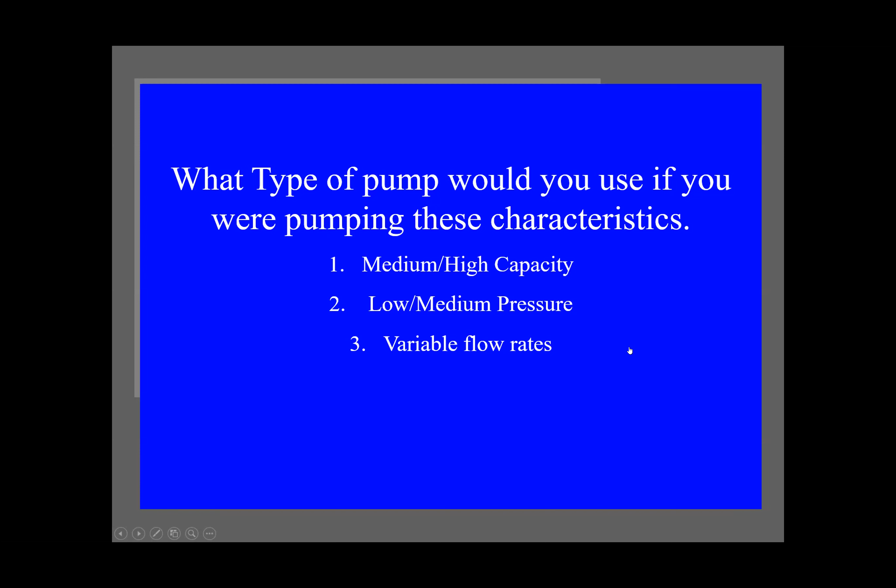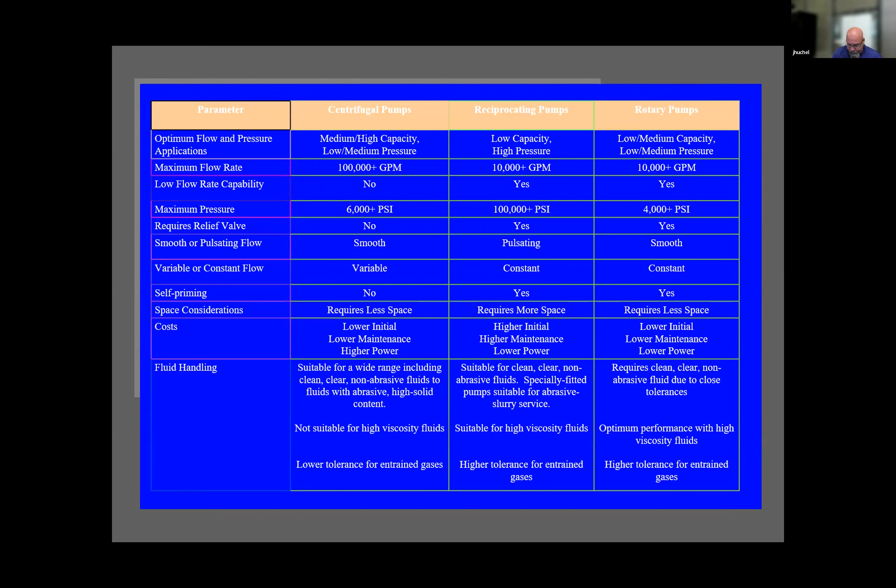500. Let's see. You have to look at pump selection here. I'm not seeing any hands. And again, this isn't a really fair question to anybody because all of them are different. But it pretty much would explain to them, whenever they were taking their test, which pumps are used for which process. Oh, hang on. We lost the game board, but we're gonna get it right back again. In theory. Give us a sec. There we go.

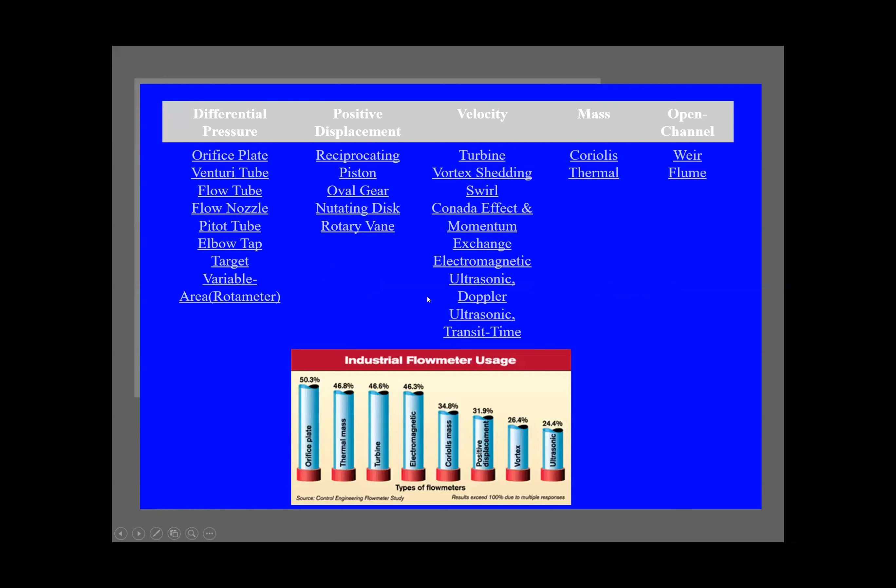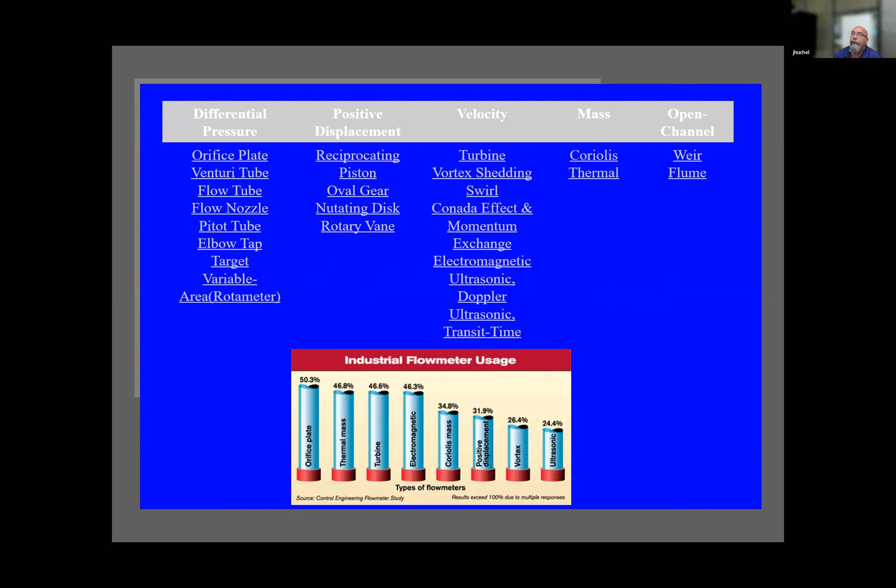Okay. I think we're gonna go for pot luck for 500. So you can name any flow meter and tell me its use, and you can be a winner. Ooh, we got two hands. They both went up at the same time. Well, if you both can answer this question, then you both get points. So Darren, you can go first. A magnetic meter measures full pipe flow. Okay. Mike? I was gonna say a Parshall flume normally measures wastewater flow, influent flow generally. I'll go along with those. Yeah, there's a flume. They're all different types of flow meters, with different applications. Good job. All right, why don't you two go ahead and pick the next topic?

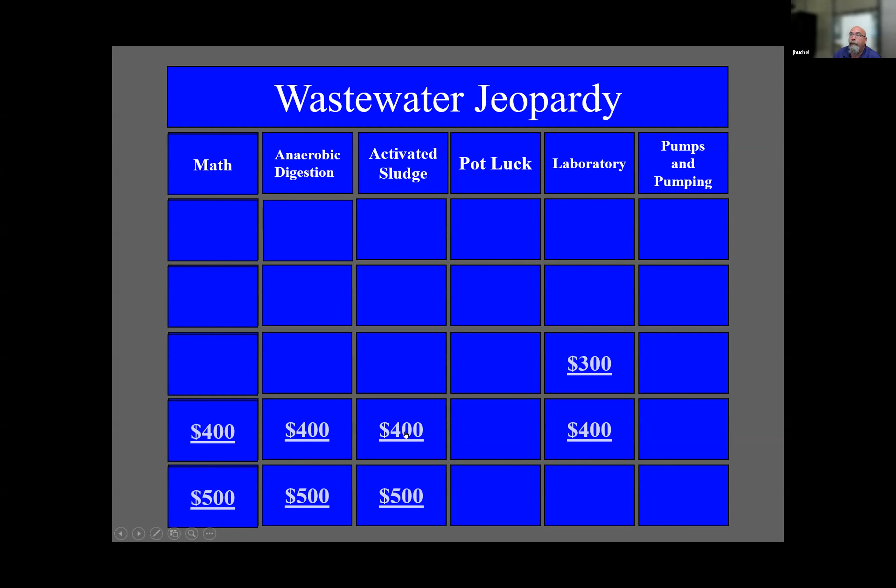Activated sludge for 400. Activated sludge for 400. I almost did that anaerobic digestion again because I love anaerobic digestion. So name me a cause of sludge bulking. Pick any one that you want. I can tell you there's up to at least 6 of them that I found.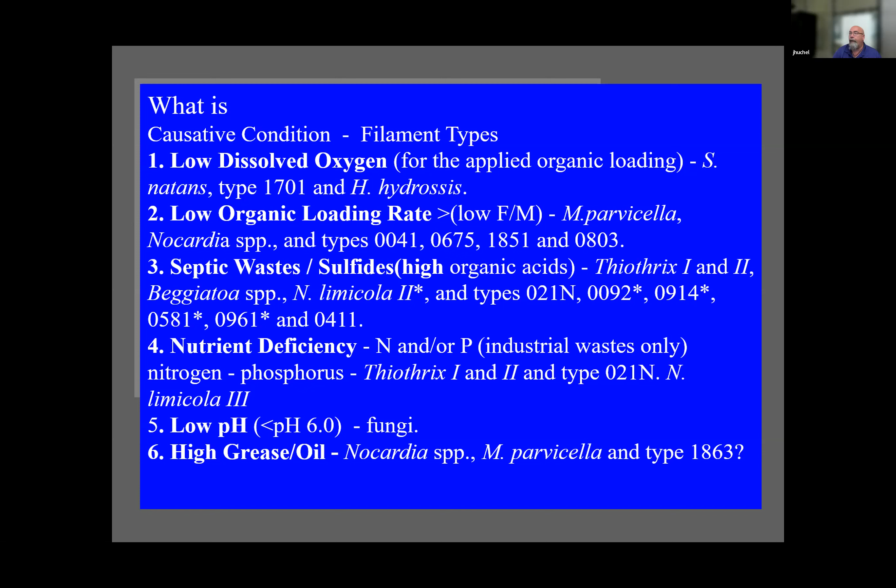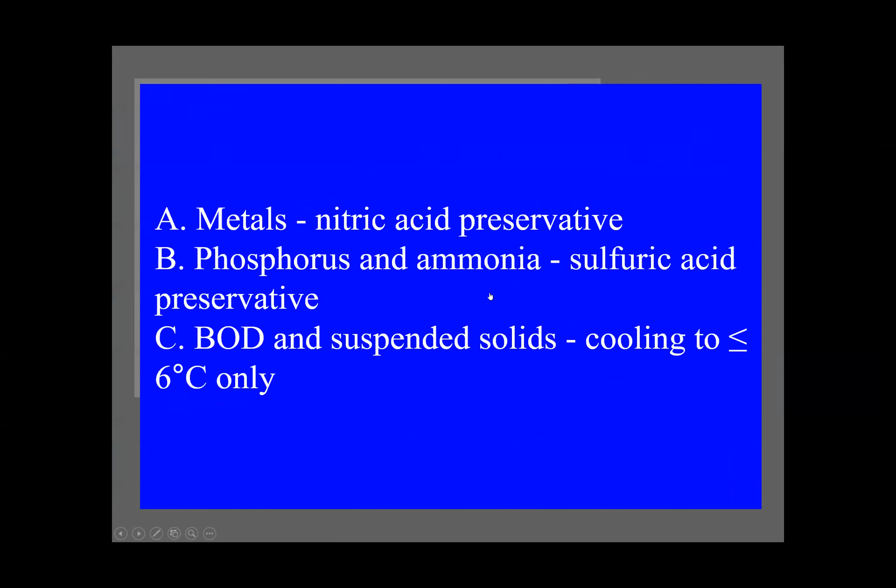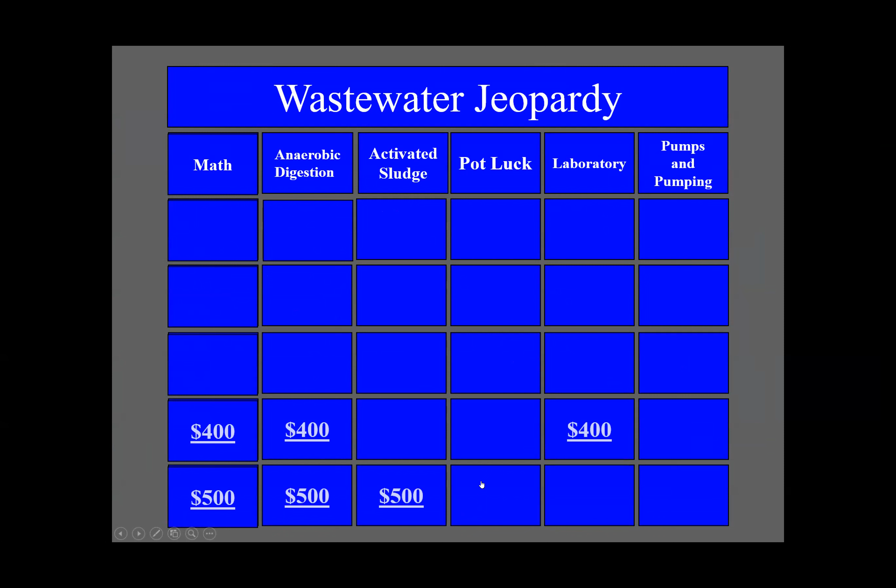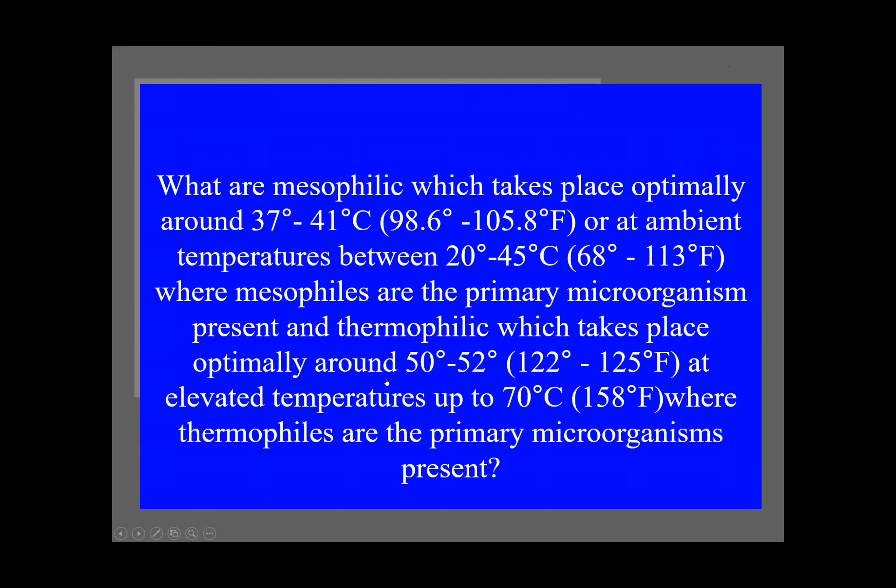Since nobody really likes the laboratory, let's go there. You can pick one and tell me what the preservative action is required. Mike Davis. Metals is nitric, I believe. Nitric acid, very good. Pick our next topic because we're running out of time. Okay. Anaerobic digestion for 400. Mike Davis. We use mesophilic bacteria and thermophilic. Mesophilic is normally generally not, I was gonna say, you were good. Okay. I'll take those answers.

What's our next topic there, Mike? Anaerobic digestion for 500. Four steps. Oh, there's Mike Davis. I don't know if I can get it or not, but you got your digestion of your fatty acids by your acid bacteria, and then your methane fermenters, and then it converts into the gas, methane gas. So the breakdown of your volatile fatty acids by your various bacteria, your acid formers and methane fermenters, and then digestion of that process.

I probably can't get all the steps. That's okay. Let's pop it up. So you were along the right path, right? So there's hydrolysis, acidogenesis, acetogenesis, and then methanogenesis. Generally we talk about the acid formers doing their job and then the methane formers doing their job. But this was for training purposes and you never know what's going to be on the test. So I took them through all of it. Right, with the proper names, but that's okay. Unless I get to read them, I don't remember the proper names either. So you're all good.

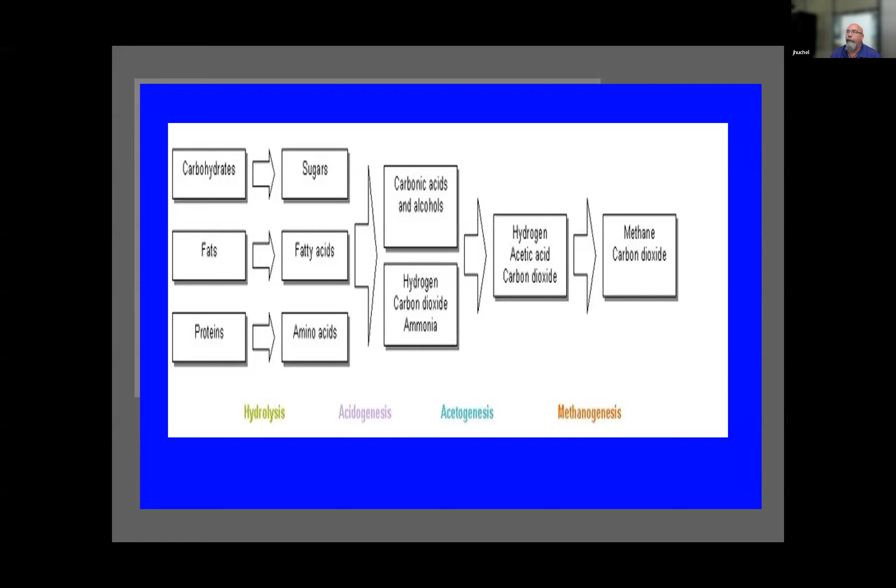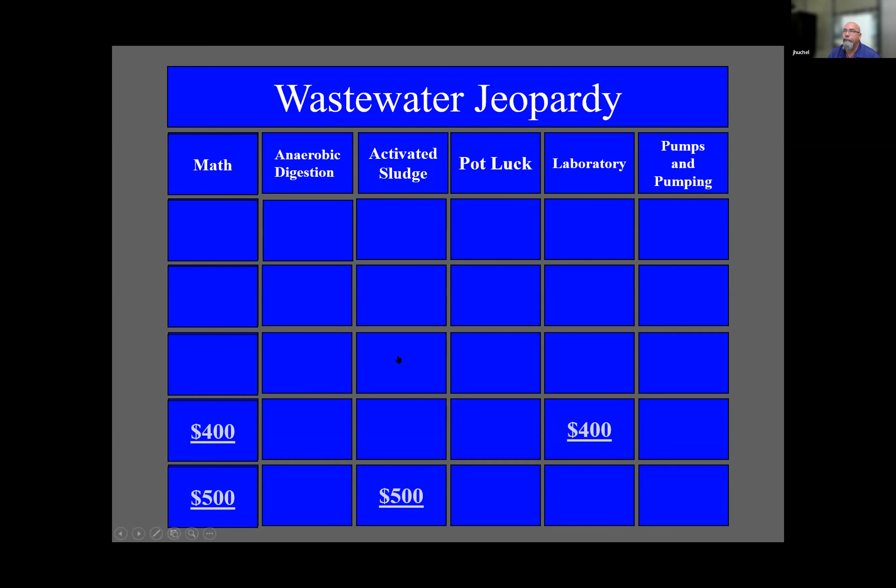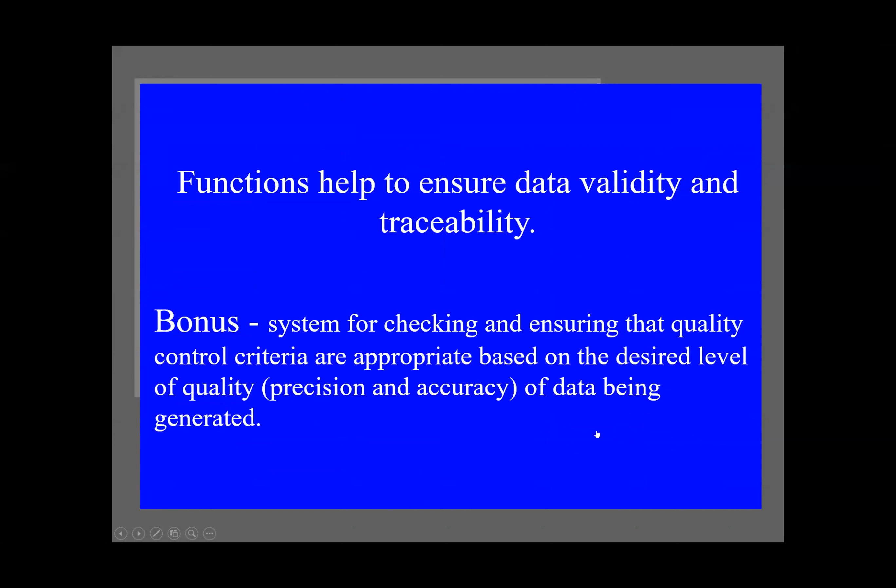All right. I think we got time for one more and then I got to stop. Laboratory for 400. And it's a bonus question. Mike Davis. I don't know, peer review. What is quality control? Oh, yeah. QA, QC, right? It's all right. Peer review is a form of QA, QC, but yes. There you go. And again, you have to remember that we were talking about the lab. Lab is always QA, QC, right?

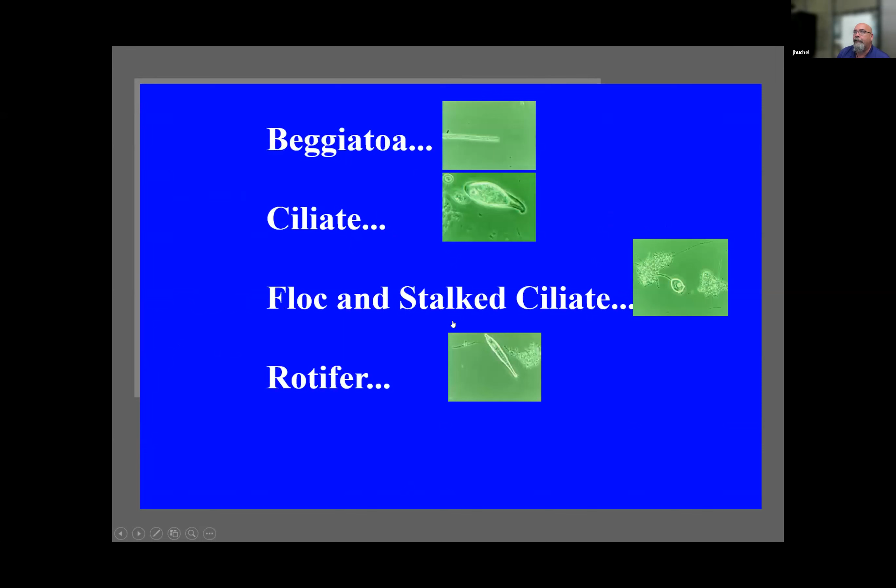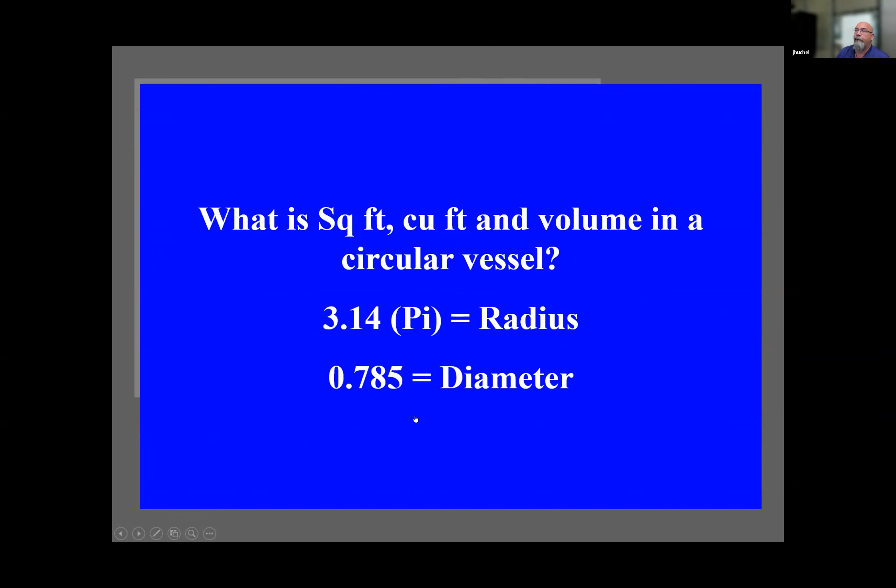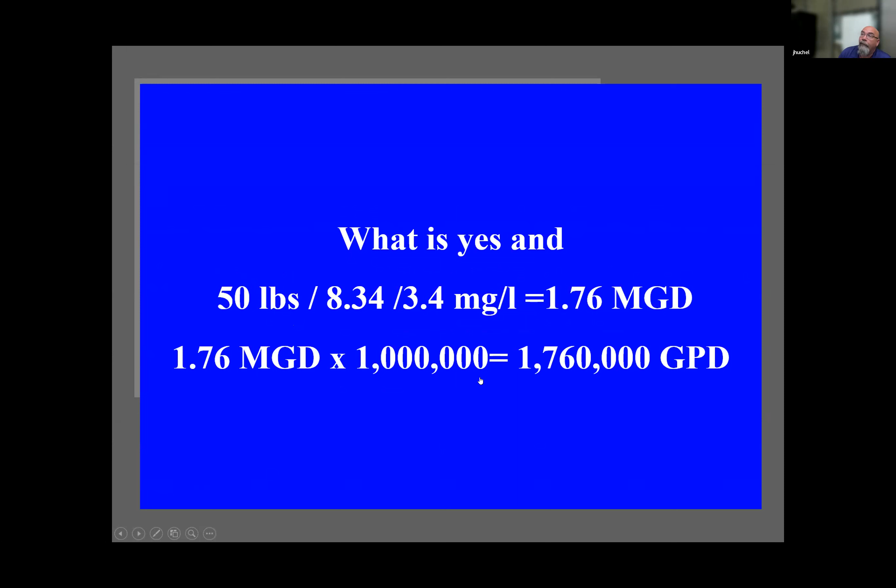So just for fun, organisms with the activated sludge process, some math, blah, blah, blah. This was also a bonus question. So it's pi. All my engineer friends were talking about pi on Monday because it was 3/14. So that was fun. Pi is used for the radius. And if you know the diameter, you can use 0.785. And then the last one was actually a math question from that formula that we used before. Some of you all read a lot faster than I do. Yeah, me too.